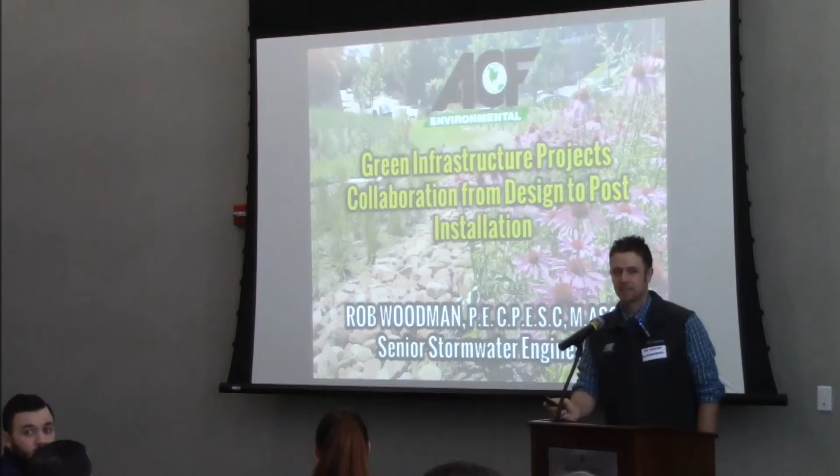And contractors in the room? Okay, interesting. So we did this yesterday too, and there was a much more even spread amongst people here. And those who work township, government, municipal, conservation district folks, obviously stacked over on the bench here as well, a few at the back. Okay, great. Biologists, thank you. Sorry, I will forget some, and there's probably some others out there too. My goal is to not offend any one particular group too many times as we go through this today.

So ACF, the company I work for, we're Maine to Florida. We've got yards up and down the East Coast. We've been around for about 33 years.

We're really the early adopters of geosynthetics and innovative applications, the creators of the dirt bag and really exciting BMPs with really cool names. We're distributors, we're manufacturers, and we make a lot of stuff. We sort of like to say that we sell systems, not just products, and you'll see elements of the kind of system approach we have as I go through some of the case studies today.

The reason I show this is that I get to work from Maine to Maryland, as was mentioned in my introduction. And what's really interesting from Maine to Maryland, there are so many different things going on when it comes to site development projects.

Regulations are different, so different. Even from Maine to Massachusetts, totally different approach to stormwater management, which is crazy when you think it's all part of the same EPA region in a lot of cases. But different soil conditions, different challenges, different experiences with green infrastructure, some of the early adopters versus some folks who may be catching up later on.

So it's a very unique role I get to do, where I get to see a lot of different things that are happening and see programs that are doing well and ones that are doing not so well. And the ones that are doing well are generally where collaboration is alive and well.

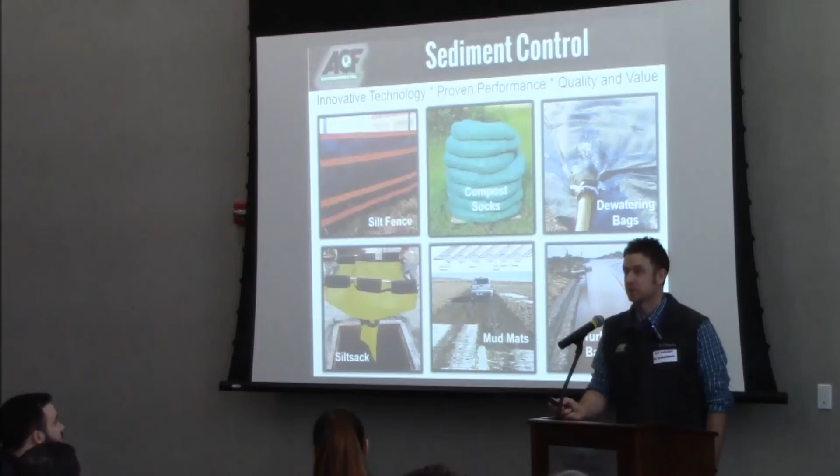Erosion prevention, so ECBs, TRMs, ACBs, geotechnical stabilization, grids, geotextiles, green walls, innovative aggregates, stream bank protection. We're seeing this more as it relates to the MS4 world these days, with either green slopes or just protecting or providing slope stability solutions in the green space, as well as the hard armor solutions. So these are the types of things I get to dabble in.

And on the stormwater side, a whole bunch of different kinds of solutions, from storage to green infrastructure to permeable surfaces and all kinds of filters. And the reason I throw that on the board is that a lot of these different pieces sort of work in concert with one another when it comes to solving challenges in the green infrastructure space.

But enough about that. Today we're going to talk about collaboration - the importance of collaboration as it relates to general site development projects, and also specifically some of the challenges with green infrastructure endeavors or low impact developments. We'll touch on collaboration in design, and I'll go through a number of projects in the grant funded space.

A couple of New England projects that I can share with you, a redevelopment project that's happening in the city of Baltimore. We'll talk about collaboration in construction, which is a very important part of this process if we're going to see our designs come to life in the field and be built the way we want them to be built.

And then at the end, I'll just touch on a couple of programs that I get to experience and rub off on or deal with sort of passively in the city of Philadelphia, and also a project I'm working on in Reston, Virginia with the ASCE headquarters GI retrofit. So that's kind of where we're heading.

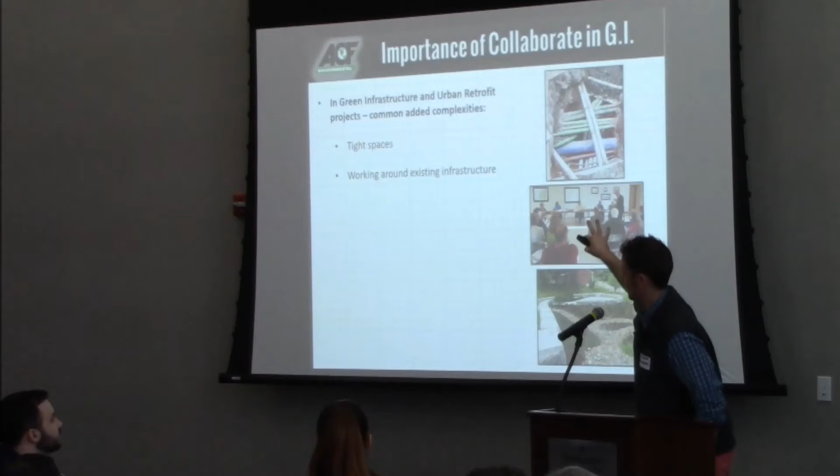Working around existing infrastructure - you don't see this too much in Maine, but as you get into slightly more cityscape areas, the chances of hitting an unexpected utility increase, particularly in retrofit work where maybe the same due diligence isn't done up front with survey work. Coming across unexpected utilities, how do we work around those?

In green infrastructure, a lot of these projects also affect local business. So it's great to be able to plonk a right-of-way bioswale in front of a little strip mall, but does the strip mall know about that? How do they feel about business being affected during construction? That's an element of collaboration and coordination that needs to be achieved.

There's an abutters and public process. A lot of these green infrastructure projects have a lot of folks looking in on them with various opinions as to whether green infrastructure is something they like or dislike.

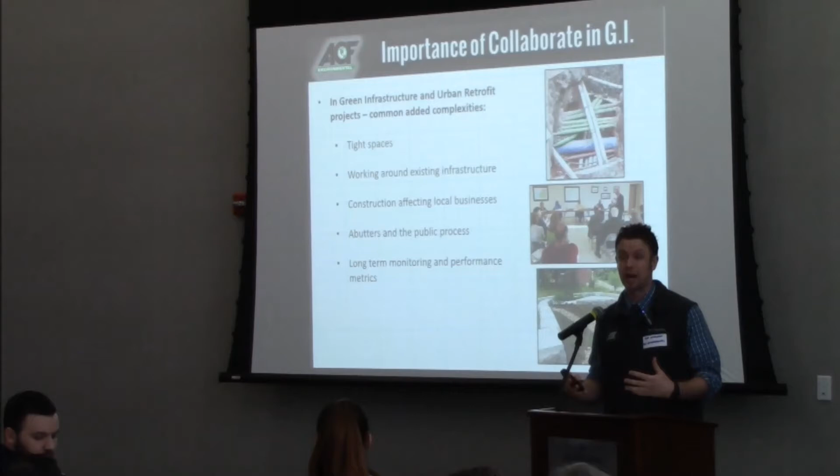Green infrastructure projects also often have metrics for long-term monitoring and performance. So it's not just throw this thing in the ground, but is it actually improving water quality at the bottom line? Aesthetics and maintenance - the idea of not just function from the engineering side, but also it being a feature is a much bigger part of green infrastructure.

In certain site development projects, you can put some kind of wet pond in behind a building and no one really cares too much about it. But in green infrastructure, it's usually tight spaces, usually right around residential or commercial or infill business, and it has to look good too for green infrastructure to keep moving forward.

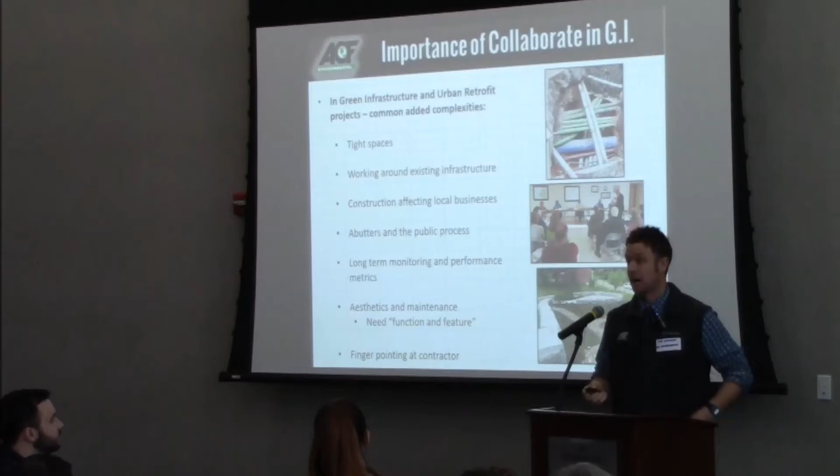Unfortunately, in green infrastructure as well, we don't see a lot of collaboration between the design team and the folks building it. Because of that, there's a lot of finger pointing that we see at the contractor post-installation. But is that finger pointing justified? All the engineers are like, yes, it is.

I'm going to finger point all day long. But do we do the best job we could as designers to get these contractors set up for success? Maybe we do, and maybe we don't.

We start at the top to bottom. So, organic mulch. Organic mulch is a very generic term that could mean a lot of different things. Is that softwood? Is that hardwood mulch? Is that diligently screened, or is there a lot of fines in that mulch that are going to clog the system from the get-go and not even let water through that surface layer? Is that a bag of red mulch from a Home Depot, or is that something specially sourced from a landscape yard?

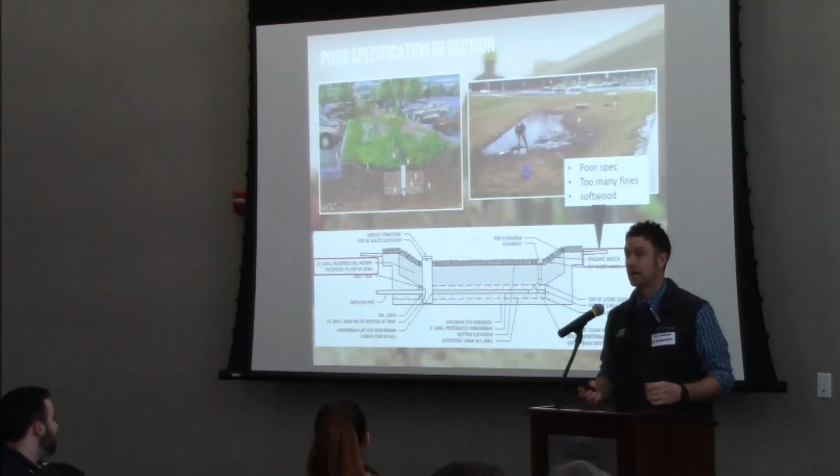Is that a fast-draining material? Is that a slow-draining material? And that also ties into, is that the right material for certain types of plants? Trees, or should it just be shrubs, depending on the depth and the type of material in there?

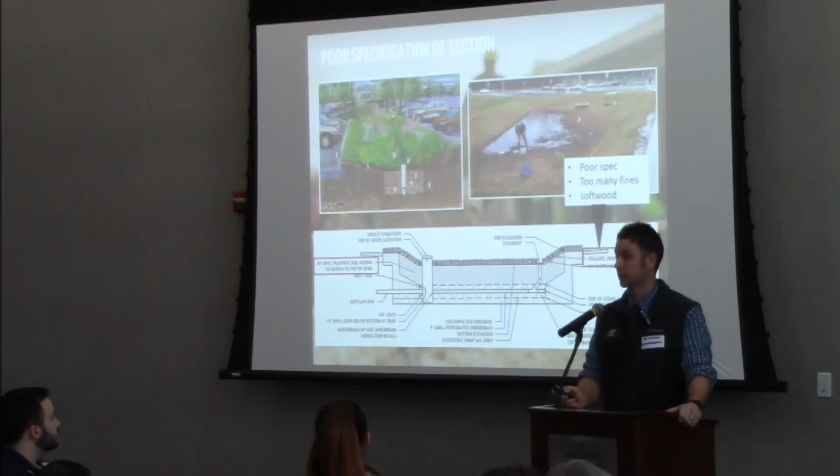Also, when it comes to water quality, what are we using for our organic content? If you think about the research out there from ASCE and their BMP database, the compost-based medias are showing to release a lot more nutrients than they're actually pulling out. So you might put in the system, it might drain fine, but are we actually improving water quality at the downstream end? We might actually be leaching out more nitrogen and phosphorus than we thought we were pulling out of the system. Something to think about.

Does it work, or does it actually work for the purposes of water quality? Is that material mixed in the field? Is that sourced from somewhere special? Are we actually testing that material to make sure it drains and has appropriate water quality? Something to think through. When we get into the sub-base materials or the stone layer with the underdrain, you'll see here it says a geotextile wrap on all sides.

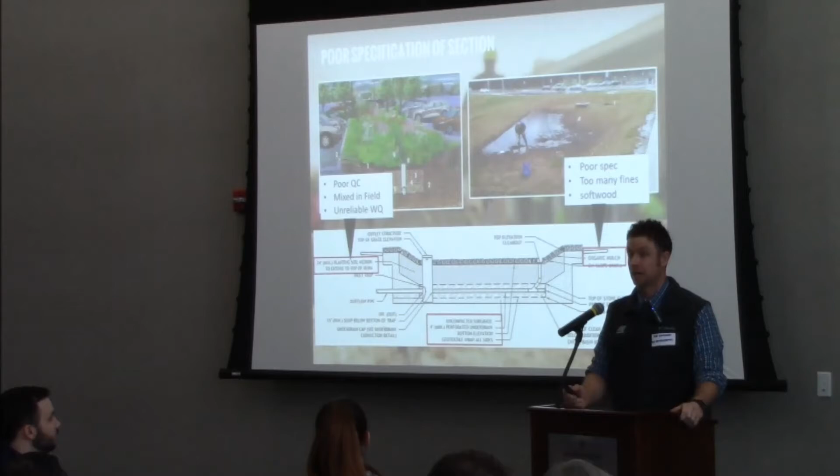For those who have been in the construction industry for a while, you know there's a lot of different geotextiles out there. I joked yesterday that obviously the clothing we're wearing today, geotextiles, even these pink pants—one might say my wife and I need to collaborate more on my fashion sense—but these are all geotextiles, and you're not going to wrap an underdrain with your shirt. You might if you're really desperate and running out of material on site, but probably not going to happen.

So what is that geotextile? When I was working as a civil engineer, I wrapped everything in Mirafi 140N. That's just what I did. Everything. Need fabric, 140N. 140N. I probably made Mirafi a ton of money over about 10 years using their fabric in absolutely the wrong applications every single time.

That's a great 3.5 ounce separation material, but that may not be the material you need for your application. So when you're doing a detention system that doesn't need to be formally lined, a non-woven is a good material, but usually not a 3.5, usually like an 8 ounce, a little beefier so it can hold up to the installation. When you're doing infiltration, we generally use woven monofilament fabrics. They have similar drainage passage to a non-woven, but they're less susceptible to clogging. Something to think about for infiltration.

It's not just a fabric. What kind of fabric is that? Obviously, then you have liners and all kinds of other things. We even use a material called a microgrid that Tencate makes. It's called SR18, a small biaxial geogrid. It's a really good clog-proof layer when you're wrapping like a stone envelope and just want some basic separation. Important to think through these things, and it's kind of funny to look at, but I'm sure we've all been guilty of just grabbing a detail, plunking it on a plan, and maybe not thinking through these individual components.

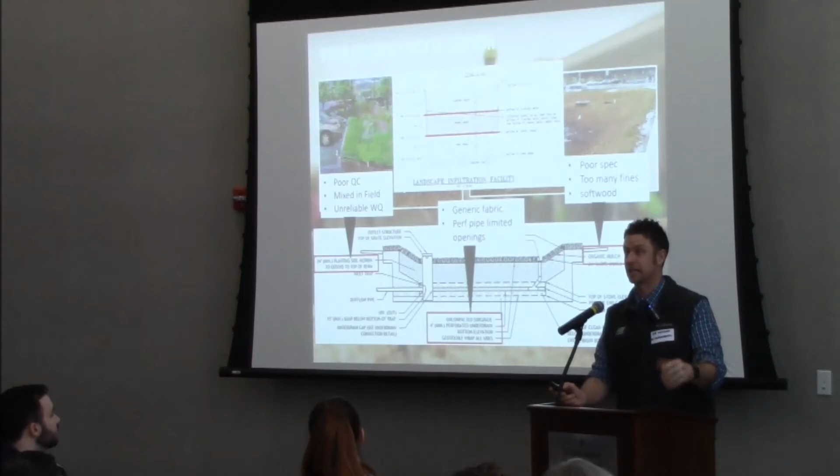In Maryland, they have a BMP called the Landscape Infiltration Facility, and they actually put 2 layers of fabric through this BMP. So if you spec the wrong fabric and happen to get particles or water through that first layer, it's kind of like a game show for BMPs. Then you've got another layer to try to make your way through.

Most of the BMPs, we're seeing a lot of manuals, and PA fits into this somewhat, starting to move away from geotextiles altogether and just have a smart transition layer from a finer material to a coarser material as you transition to the underdrain layer. So just be thinking through this: is the geotextile necessary, and if it is, what kind of geotextile do I want to use?

Then we get to plantings. Plant health - what kind of plants are appropriate for these types of medias? If you have 18 inches of high flow media or sandier material, it's probably not the place you want to put a nice big tree with a 2-foot root ball. It's not going to do well, survive, or thrive in that environment. But trees obviously want a nice, rich, deep planting soil.

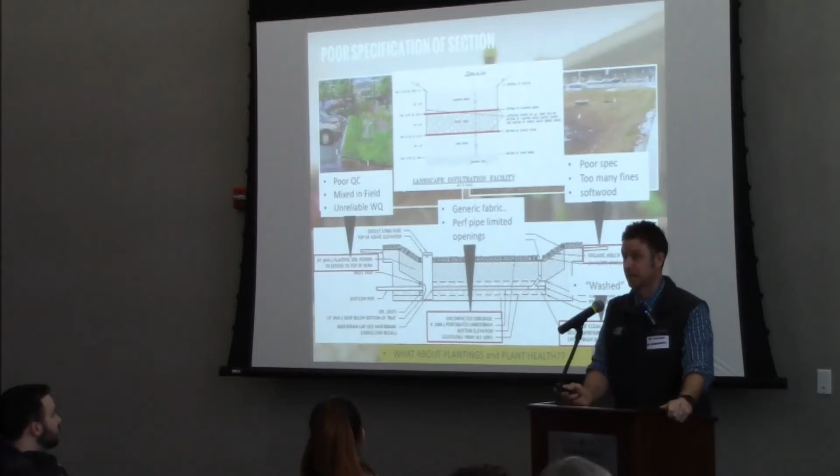So maybe there's opportunities to do trees beside our bioretention system, but maybe not right in it. And maybe in the bioretention system itself we do smaller shrubs, perennial grasses, black-eyed Susans, daylilies - these types of things. Native plants, of course, as you'll hear about a little later. But these are important things to think about, because if we don't do that, we'll get into some issues.

A little note on civil engineers versus landscape architects, a classic battle historically noted for decades. The civil engineering plan can be kind of simple and boring and geometric, and oftentimes when civil engineers design these systems, there's a missed opportunity for function and feature. Everyone has a different appeal and aesthetic for different things.

But here's a classic civil engineering system. It's a perfect rectangle of mulch. I went out there with a protractor and made sure it was exactly 90 degrees. So everyone in this room who raised their hand for the civil engineer category would be pleased. And there's one plant species, perfectly laid out in rows and lines. Well done - a civil engineer was here.

The next one, plants were just optional, and we decided to beef up the riprap just to make sure, again, we knew a civil engineer had been there. And these maybe aren't what folks are thinking of when we present this great plan for green infrastructure to a municipality as the future. But let's flip it around.

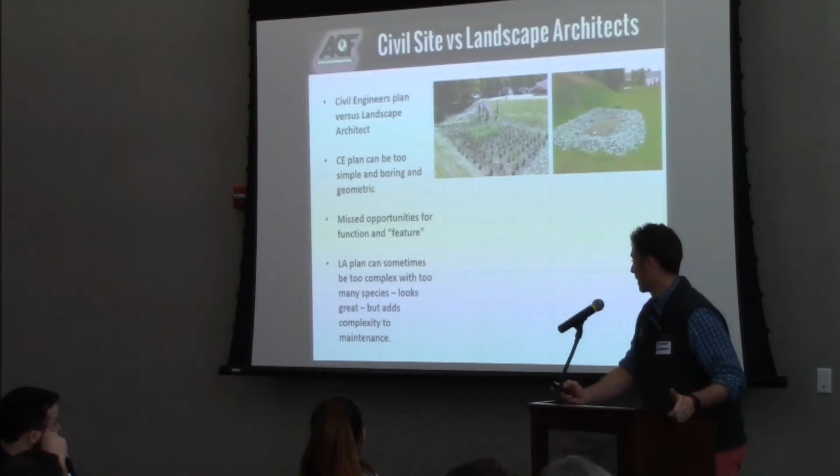Landscape plan can sometimes be a little complex with too many species and maybe adds complexity to maintenance. So while this looks nice, unless you have a very qualified contractor coming in to maintain this thing, they'll either kind of freak out and walk away, or deadhead the whole thing thinking it might all be weeds. Neither of those are probably acceptable reactions.

A lot of the research I'm seeing out there, and some of the papers I've seen recently on LinkedIn, suggest that 3 to 4 plant species with a little variation in height and seasonal color might be the right mix for a rain garden treating water, or a bioretention system, spaced appropriately so you have room to access and maintain and clean that media surface.

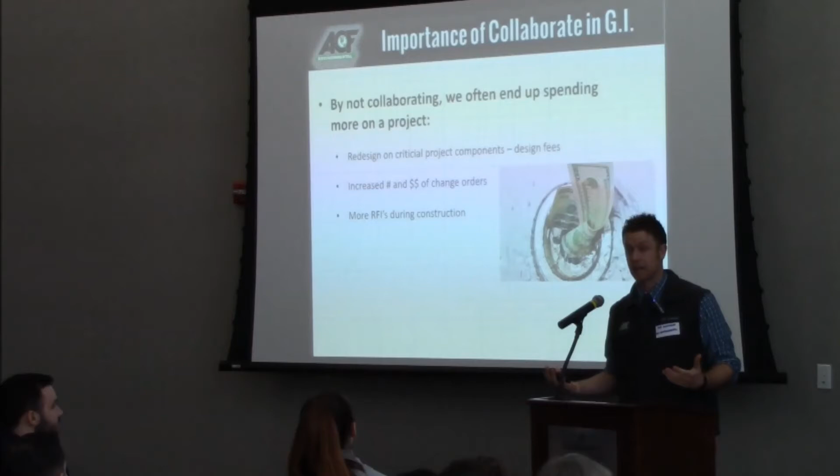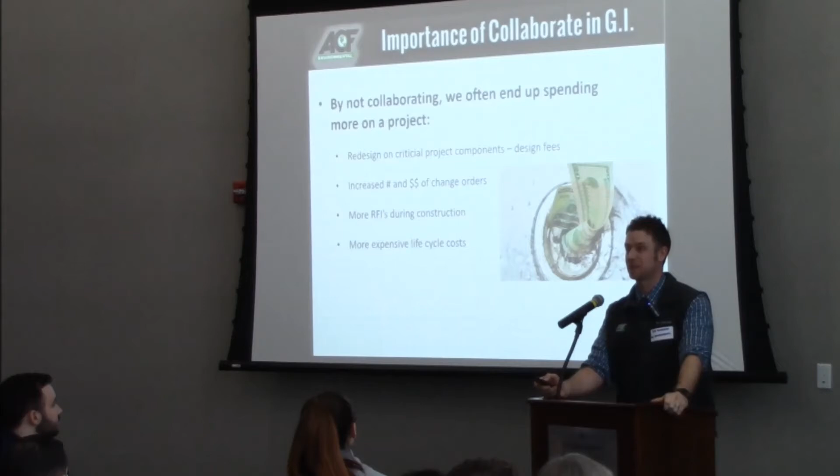Sometimes you get more expensive lifecycle costs, and that's usually just a communication issue between the owner and engineer. They may not actually be more expensive, but they might be perceived as more expensive if the owner believes, like many do, that BMPs never need maintenance. But as I point out, your car needs maintenance, your marriage needs maintenance, and guess what—stormwater BMPs need maintenance too. You also get more complaints, which means more processing, administering, and maybe making changes beyond the scope of the project.

So with all that said, that highlights a lot of the challenges out there when folks don't sit down together and do business at the table. You might be asking, how does a guy who works for a products company like ACF fit into this mix? Well, we get a unique perspective on the industry because we work with both engineers and contractors. So we have this kind of unique position where we can actually initiate collaboration between these parties, which seems a little bizarre.

But these days, with contractors spending less time working with engineers and engineers spending less time in the field, we're in a position where not only do we have a bunch of innovative solutions we help folks with, but we're working with the engineer during design, helping them through that process, whether it's with our systems or just coming up with the appropriate fabrics and liners and those types of things to use.

But we also are out in the field with the contractor during installation, so we get to see a lot of things going on. Some have gone really well and some have gone poorly. And it's usually because the contractor and the engineer have never actually met and spoke. Plans went out, project got bid, engineer moved on to the next project, contractor bid the job based on their understanding of the plans and the detail that was there. And now we have a large gap that we have to overcome during or often post-installation.

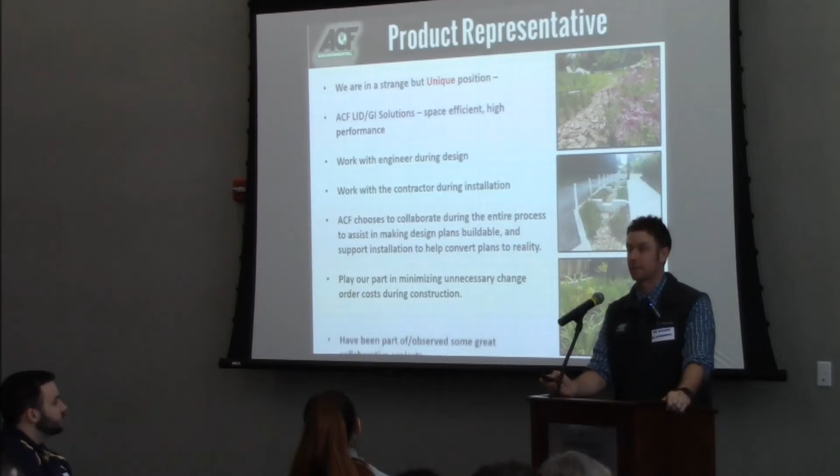So we've been part of some great projects. I'm going to touch on those for a while, a couple of different categories. Up in Maine, that's where I did a lot of my consulting work, so I know a lot of players there. A lot of grant monies going into coastal Maine, southern Maine, coastal neighborhoods, and we've been helping folks through that process.

On grant-funded projects, the parties are usually pretty similar to most projects, but you've got town staff, you've got the DEP, who are usually the ones administering the grant monies and making sure that the money's being spent appropriately, environmental engineers, and local watershed groups who are usually running point on the education component of these projects.

Folks like us get in to try to help solve the challenge, and often we'll get a call saying, hey look, we've got $3,000 in this grant, we've got 11 acres of impervious we want to treat, and we have to obviously walk them back from that and realize you can probably only pick up maybe 500 feet of curb line with that $3,000 budget.

But that's sort of a role we play in kind of tempering the budget and making sure the monies fit the goals. In these cases, Public Works is often the installer of the systems. It's a labor match as part of the grant project. So the grant pays for the materials, and Public Works matches that cost with labor and equipment.

You've got public, landowners, abutters. The specific challenges with these grant-funded projects often involve specific pollutants you're trying to go after. A lot of the work I do in Maine is bacteria-focused, bacteria and stormwater near beach outfalls, but maybe it's metals, maybe it's phosphorus for lakes. It depends on where you are. But usually you're targeting a specific pollutant that may not be your standard kind of pollutant array when it comes to site development projects and permitting.

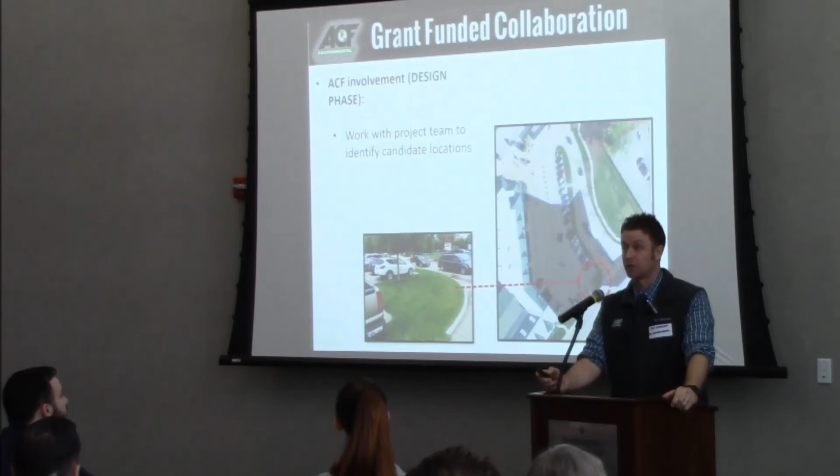The way we work in these projects, we get out there and help with the windshield survey, so we try to identify candidate BMP locations. For those doing this type of work, whether it's MS4 retrofit or any of these types of projects, there's nothing rocket sciencey about this.

When you're looking for locations for these BMPs, the goal often is to look for areas where you get a decent amount of sheet flow already going to a certain location where you can intercept that water and treat it. When you start getting into reshaping pavement, adjusting curb lines, and doing a lot of peripheral work, like adding storm drain lines to feed something to something, you end up spending a lot of your money on the piece that doesn't interact with the actual water quality process.

So this was a good example of taking about a 0.7 acre chunk of a high profile retail parcel right to one location, and all we did was convert a catch basin to a solid cover, open up the curb, and built a BMP right in that island that was designated there. Very little ancillary work needed for that.

We develop sketchbooks, and we do this at no cost, so folks have a general sense of what this is going to look like, what BMPs we're considering, and what the maintenance requirements are. So there's good education on the front end. We talk about which specific pollutants they want to target, and come up with smart, hopefully high performance, space efficient, easy to maintain treatment trains.

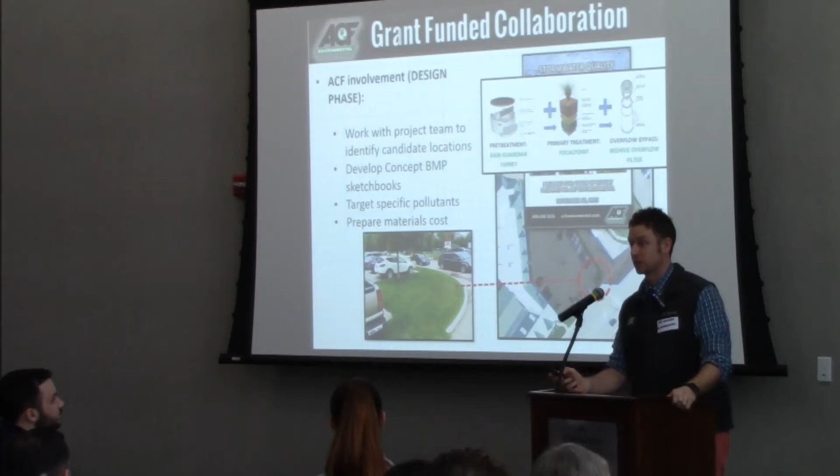Also, we get materials costs. The first round of these projects we did, we came in late when monies were already assigned, and we had to work out how we're going to fit a project to that money. Now we're a little more ahead of it, so early on in a project, we're part of that process. As we're planning for different kinds of BMPs, we're actually building a budget that gets put in when the grant money is assigned, so the appropriate monies are provided, and we're doing much better BMPs today than we were 2 years ago when we were coming out of that hole.

In the field, on these types of projects, from our end, we're procuring materials, delivering them to the site, and we're supporting and coaching the Public Works crew. Generally, we're empowering the local crews to do that. Sometimes, if they're too busy, we bring in site contractors to do the work too.

Our goal is to support education outreach. We don't make any money from doing this at all, but our goal is, in the name of collaboration and water quality, to get out there and help folks with that initiative. Usually you need someone to help, and this is the encouragement to you - each of you here can be the driver and the encourager of moving some of these elements forward, maybe outside of your typical scope, but I think that can make you unique as a professional and maybe for your company as well. Then we do post-installation maintenance, stuff like that.

In Maine, last year I worked with a whole bunch of different towns, going around, finding out what the pollutant of concern was, looking for candidate BMP locations, and installing systems.

A couple of those systems - this is the one I showed you on that windshield survey. This was a high-profile retail, actually the Kittery Trading Post just across the New Hampshire line into Maine. Some of you may have visited there before. Like I mentioned, we found a nice 0.7 acre piece of trib area, went to this corner.

We opened up the curb, converted a catch basin into a solid cover, put in a little pre-treatment unit, dug this 3-foot - this is a high-flow biofilter, it's called the Focal Point. I'm not going to get into that right now, but it's basically a space-efficient rain garden with high-flow media. We built it up in layers with Public Works. You can see Public Works was out there because there's a good amount of riprap there.

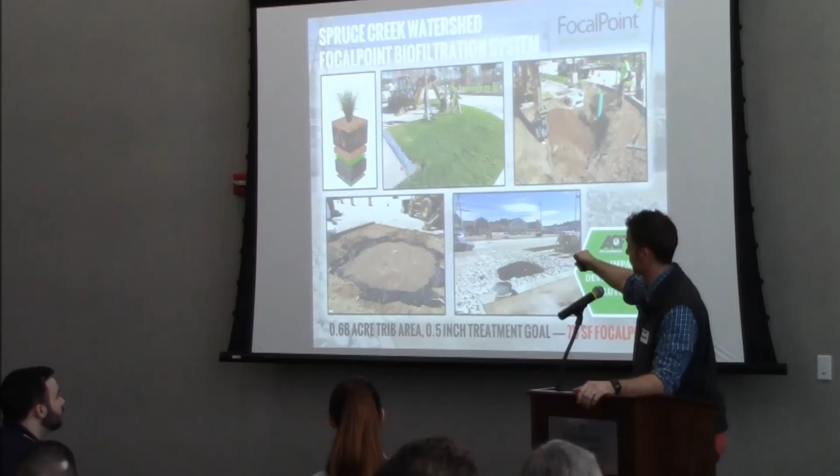The landscape architect in the room, that tree was actually dead before we started, so that was removed and needed to be removed anyway. But this system is very stable. It's not floating anywhere, going anywhere.

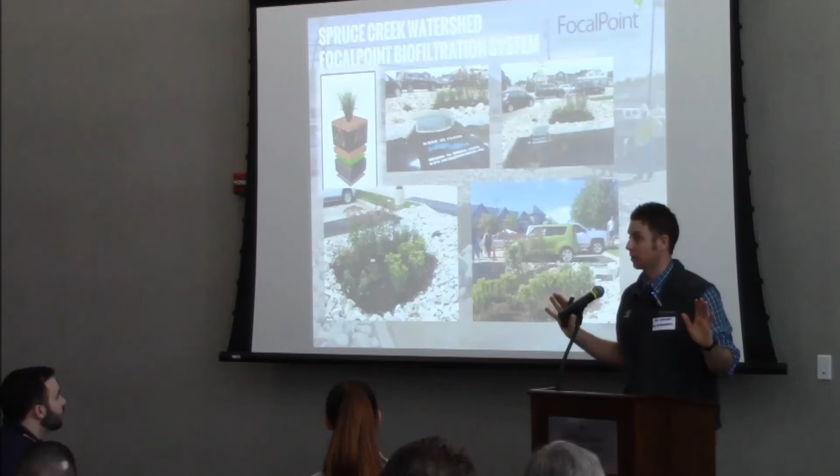What was cool here is we actually collaborated with the owner, because this was on private land. We said, hey, this is the plants we're thinking about using. And they said, whoa, whoa, time out. We have our own landscape architect, our own landscape designer, and seasonally we do different kinds of things. We'd like this rain garden to fit in with our general planting scheme. And it was really cool—they picked the plants, they installed them, and they've taken over ownership in terms of maintaining those too.

So a neat little space-efficient BMP, no parking loss, and great water quality treatment in that little neck of the woods.

But green infrastructure has a really good history of treating for bacteria. We've done our own testing on our system, but just in general, the bioretention—that plant process, all the different things happening in that soil, chemical, biological, and the like—is really good for spearing and trapping bacteria.

So these were put in there to basically collect water from that parking lot, treat it, and then release the water to a beach outfall just downstream, which had been closed and deemed non-swimmable for a portion of last year.

What's interesting in these grant-funded projects is that collaboration is alive and well. And I think maybe on some of those more local, more intimate projects, it's more realistic often for these to be part of the process, or it's sort of anticipated because you just have a lot of parties who want to be heard.

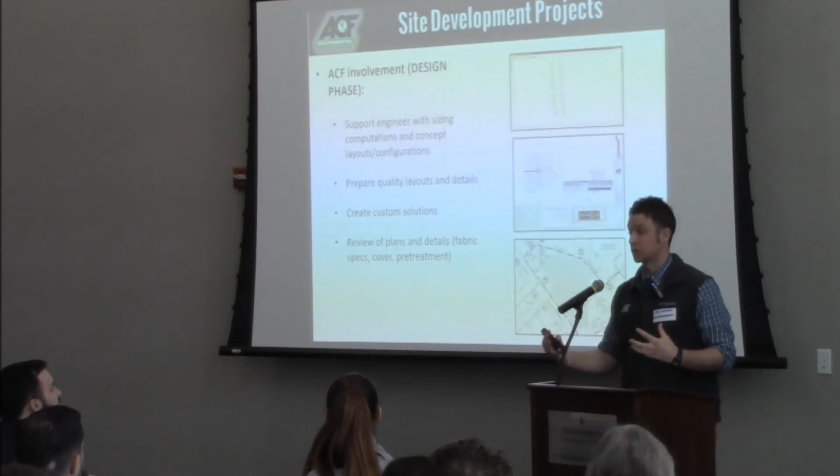Layouts and details, most companies now like us will prepare a lot of layouts and custom details for you to support your project and make your time as efficient as possible. Looking at custom solutions sometimes, and like I mentioned before, happy to review the plans and details. Our goal when I review the plans and details is to make it not just a permittable plan, but to speak into the constructability of the plan too, and the logistics of different trades and other things that are going to be coming through this site during the course of the project.

Other good thing is we can provide really good budget costs. So not only the materials cost, but also a pretty good sense of installed cost based on previous projects. So we do that kind of work.

In the field, we provide material procurement. We have our own pre-construction protocols to make sure everyone understands how these systems go together. And we support the site contractor. When you're looking to work with any kind of innovative company, make sure they have construction oversight as part of their services. That's a really important part because when you're out in the field as the engineer, maybe you haven't seen these systems go in a whole lot before. So it's good to have someone out in the field, sort of a tech or a representative from these companies, just to make sure things are moving along the way that you think they are.

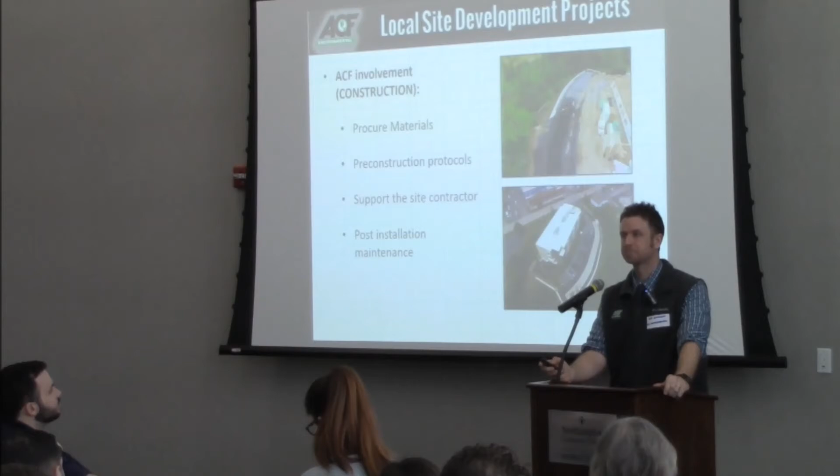Okay, a couple little projects here. This is a great example of when we talked about different kinds of geotextiles earlier. This was an infill housing development project. They demoed a little individual single-family home and somehow built 4 housing units on the lot. It's like a postage stamp lot, but that's the way of the world, it seems, these days.

What's interesting is from the face of the building all the way out to the edge of our subsurface system, our R-tank, there were 5 different fabrics used, 5 different materials used to make sure the system would perform correctly. So when I first got this plan from the engineer, they just had a line that said geotextile, kind of wrapping the irregular shape of this section.

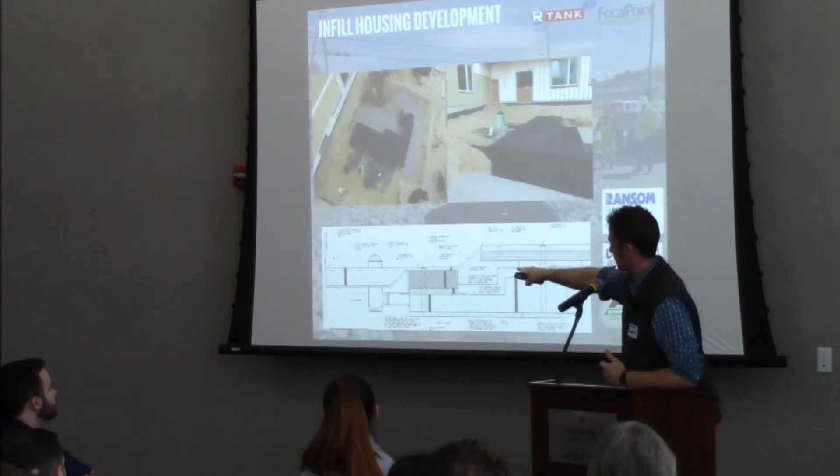In the end, roof runoff comes off the roof and hits this riprap spillway, or splash pad. Originally we were talking about using a liner around that riprap apron. However, the liner would prevent water from eventually draining out, so you might have a mosquito issue. But we also didn't want it to drain too fast because there was a foundation drain in the corner, so we didn't want it to short circuit straight down to the foundation drain instead of going through the treatment process. So we used a much heavier fabric, like a 500X, underneath that riprap so it would drain slowly but wouldn't be free draining, and also wouldn't pond over time.

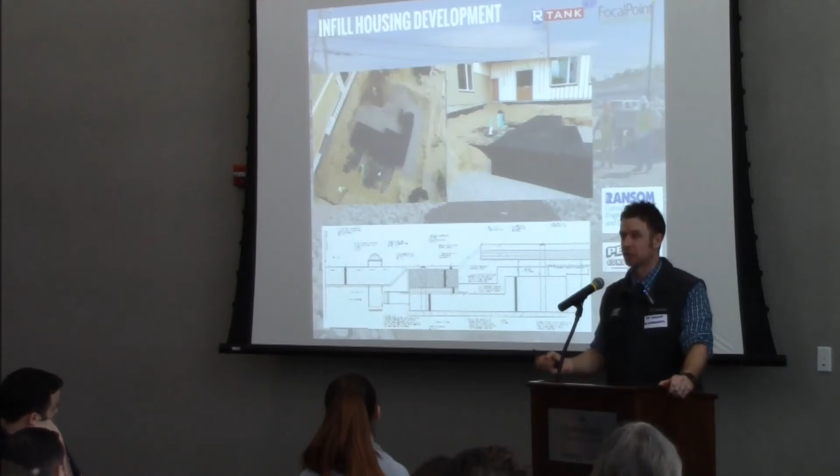Water came through that spillway, stepped up over onto this biofilter, one of our FocalPoints, and filtered down through. We transitioned to a non-woven fabric as we came out of that riprap area. There was a microgrid and a woven monofilament through our biofilter section, and then we used a little curtain of liner on one edge to prevent water from seeping out the side. So a lot of different materials in there. Again, if we just said geotextile everywhere, the system would not have functioned the way we wanted it to. So it's important to think through those things.

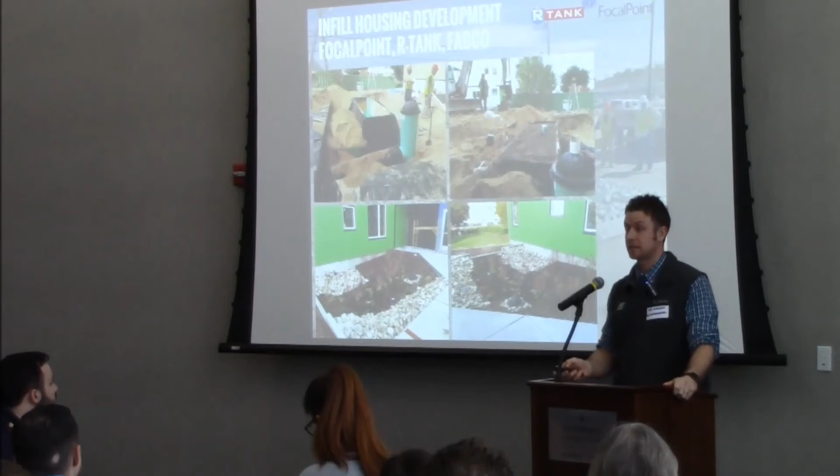This one has a little biofilter with expanded storage. It was built as a 3x11 sort of box, essentially, but luckily we had a great landscape architect on this project, and at the surface they made it more interesting—a little wiggle, a little berming. So it looks like a rain garden from a distance, but it's really a high performance, high flow media system.

A year after this system was put in, this is green infrastructure at its best. The building's actually green as well. I thought that was temporary for a number of months, and I was like, wait, you guys are rolling off site, what's going on with the color of the building? But they somehow convinced the city of Portland, Maine, that it was in line with the local architecture.

Right in the corner you'll see this little rain garden—that's where our biofilter is. And then there's expanded storage underneath all of that concrete patio area. So we got the 4 housing units in this very tight space. We got the treatment done, we got infiltration done, or loading ratio done, we got channel protection and flood control done, all in that space. And there was still that concrete patio area above the subsurface tanks for the enjoyment of those tenants.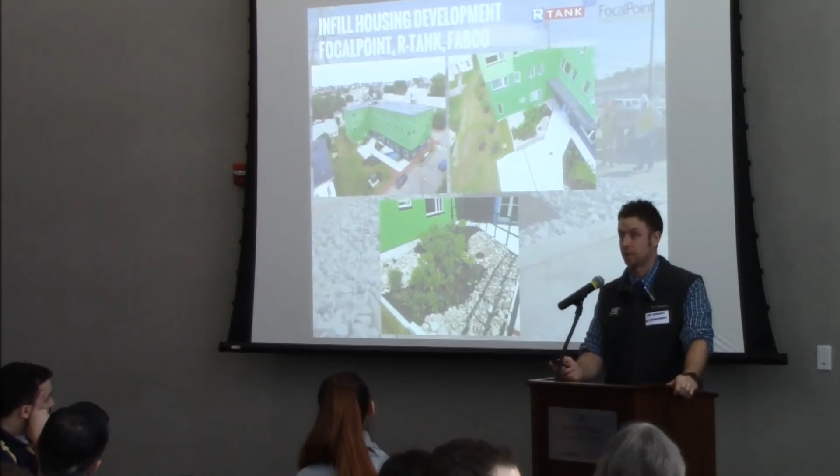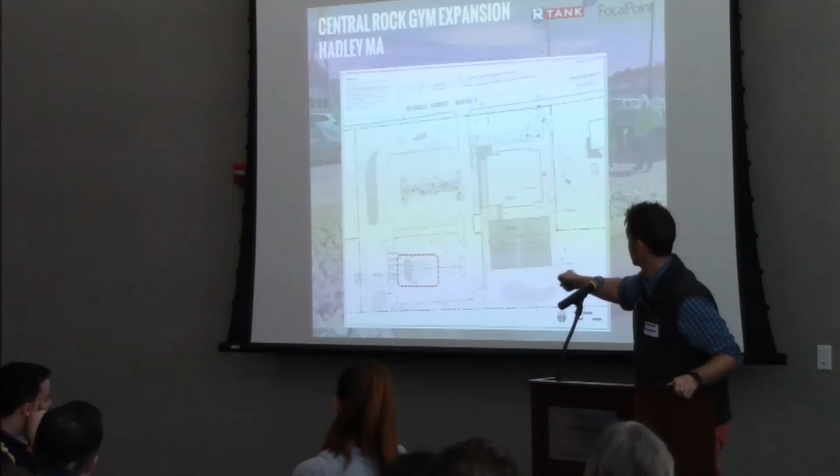This is another interesting project in Massachusetts. This was a rock climbing gym that was adding a parking lot. This was an existing parking lot up top, and a new parking lot lower down. They had the challenge of wanting to basically fill the entire area with parking, like all of us do as civil engineers—pave paradise, put up a parking lot.

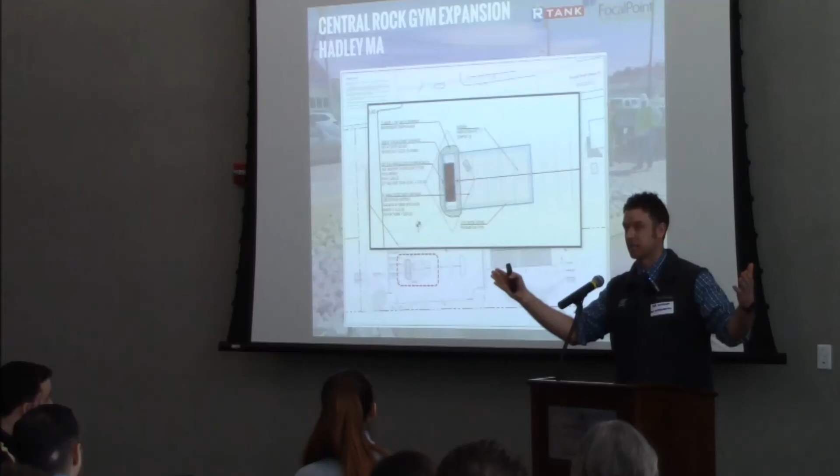We actually were able to get water quality treatment done all within the space of a regular landscape island with one of our biofilters, but we still had to satisfy a volume piece for infiltration and flood control, so we expanded our box under drain back underneath the parking lot. This is a very common approach in PA, where bioretention usually fills up all that land, but with these high flow media systems you can have a space efficient green infrastructure system drop down and still achieve loading ratio back underneath parking with HS25 modules.

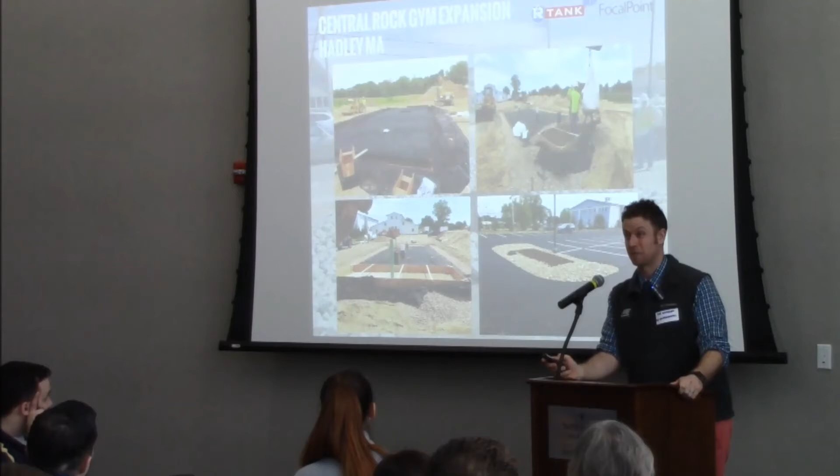So this was it being built up—you can see the tanks going in and then the system being built up. This was very limited vertically, so this whole system from surface of mulch to underside of those modules was about 2.5 feet, very tight with regard to groundwater, but still able to get infiltration done. And here was the finished product, a great little retrofit that took a lot of coordination with the geotextiles, making sure water was getting to the right place, getting filtered and getting handled post-treatment for infiltration.

This is another nifty example of collaboration and coordination. This was actually the same engineer and landscape architect that worked on that infill housing project I showed a minute ago. This is another infill housing project, but right next to an impaired stream, and we had a very unusual shaped area available for stormwater storage. So we used these R-tank modules to create a nice chunk of storage in this arc-shaped area behind a big block retaining wall.

The wall was lined so it couldn't seep through. But this all had to be done in a very space-efficient area. There wasn't room for wet ponds, bioretention, all those types of things. So this one actually had a sand filter put over the top of those tanks, and then it was finished off with an open joint permeable paver.

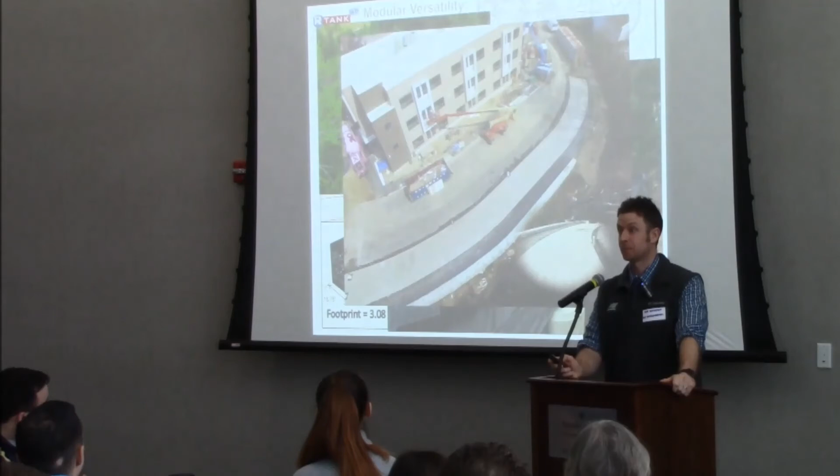You may have seen this project - it was actually in Stormwater Magazine back in May. It's a tight site; building and parking is basically the entire footprint of the parcel. The building directly discharged to the tanks, which are under those pavers. Then the rest of the site sheet flows over to those pavers, goes down through that sand filter, and is collected in the tanks for controlled release below. So a nifty application, but a lot of coordination here.

So when you're dealing with permeable pavers, most of them are concrete. In Maine, as you know, we get a lot of ice and snow, and people love to just douse salt on everything - food, pavement, the whole works. And salt and concrete don't really get along too well.

So it was important that at the front end, when this engineer was thinking about using a permeable paver, that we all sat down with the owner and said, okay, this is the BMP we're looking at, but these are the implications on maintenance. We want to use a rubber tip blade. We want to use light sanding and light salting as opposed to really heavy salting, because over time that'll start to pit that surface. That was important to have, as opposed to coming back a few years later and the owner saying, well, what's going on with these pavers? They're falling apart. Well, what are you doing for maintenance? So it's important to have that conversation.

That's become way more of my dialogue early on when I'm working with consultants now - having a realistic conversation. Okay, yes, this will fit here, or yes, this will achieve your goals, but what does the owner think about having this particular BMP on their site? How is that going to work with their long-term cost of ownership?

In Baltimore, another little project to touch on - I'm working on a project called the Hendler Creamery. It's a redevelopment project of an old brick building in downtown Baltimore. Really interesting group called the Design Collective - I don't know if any of you have worked with them before, but they have landscape architecture in-house, architecture in-house, mechanical plumbing, structural in-house, and the only group they didn't have in-house was civil engineering. So they worked with KCW, who some of you may have heard of before.

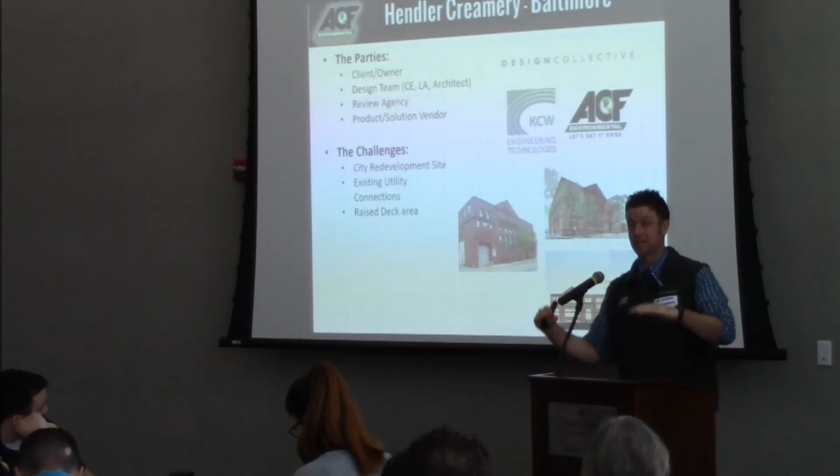This building had a few interesting challenges: shallow existing utility connections in the street, and this redevelopment project was basically going to have a raised deck - parking underneath and a raised deck. So all the stormwater actually had to be at least one level above grade, which is kind of different.

Not only were they looking to treat the stormwater, they're also looking to make this a very high-end raised deck area with pavers and benches and a really nice aesthetic for their tenants in this new residential wing. So they need to use green roof media for the trees they want to plant - lightweight but suitable material. However, that green roof media isn't approved as a stormwater quality treatment BMP, so we needed to use our stormwater media, in the case of this project our FocalPoint system, to handle the stormwater. But the challenge then is how do you direct droplets of water to the right place?

How do you split the water up so you get treatment before you spill over and provide water to the green roof areas? There were also structural components that had to be factored in. This is one of the only projects where the structure of the building was working in sync with the stormwater. We were playing around with the balconies, the deck, where to bring the roof drain, figuring out how to fit everything in and get our permit for both the building components and the stormwater piece.

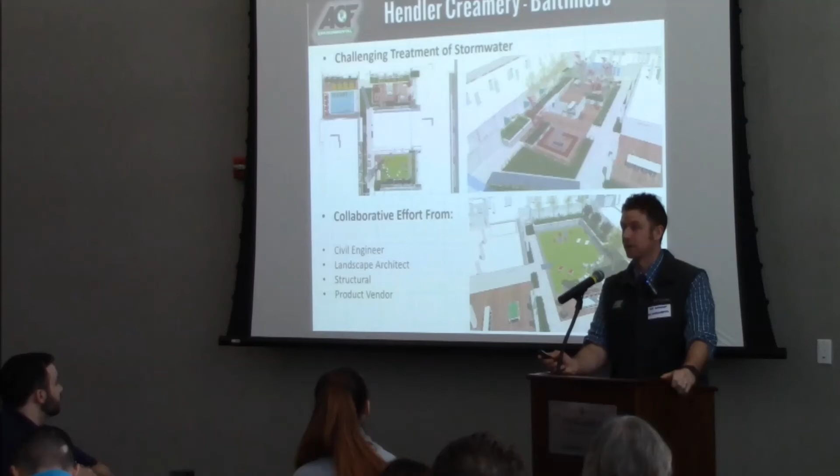These images won't show a whole lot, but as I said, we all sat down and it was this mix of four parties that had to nut this thing out. In the end, you'll see the areas where there are trees, that's where the green roof media is, and we don't typically put trees in our high flow media because they don't do very well. In the lower shrub areas, those rectangles at the end, that's where our stormwater quality areas were.

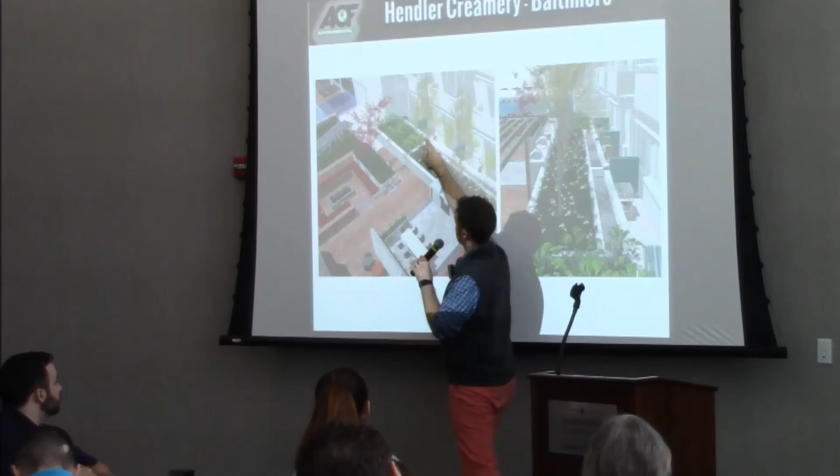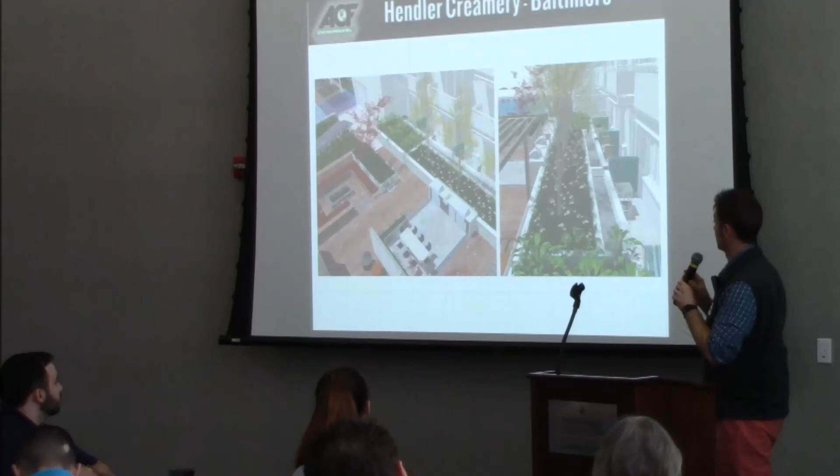You'll see here there are these little partition walls between the different balconies that take water from the roof and spill it out into this trench. This trench feeds these water quality areas, and once they're maxed out, it spills over and backfills into the green roof areas for higher or larger storm events. Looks kind of simple in concept, and you can see that here too. But the challenge, obviously, was splitting that up, getting water to where we needed it to go, and still maintaining the aesthetic that they wanted for their tenants. That one was a bit of a doozy.

Collaboration in construction - a couple of thoughts on this. I think this is one of the biggest areas where we can do something when it comes to collaboration for very low cost, and what we can add to our scope of work. Something to think about: getting contractors involved early during the design process, even knowing they may not actually get the project when it goes to bid. Getting them involved and thinking through these challenges is valuable. They've just built ten sites recently, maybe with a similar BMP, and maybe there were things that made them pull their hair out, and other things they had successes on. That voice is a very important part as you're thinking about the next project.

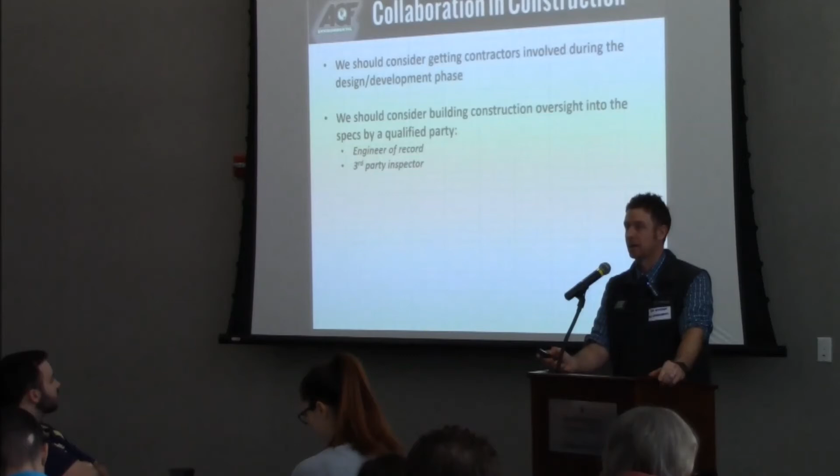Maybe that's local conditions with karst soils, clay, high groundwater table, bedrock, or whatever your local challenge might be. We should consider building construction oversight into the specs by a qualified party. Ten years ago this was standard - as the engineer of record, you would go out in the field and essentially certify the installation. We've got to bring that back. Whether that's the engineer of record, a third-party inspector, or even a product representative.

I bring this up because we often have engineers working with one of our systems for the first or second time, and they may not have a lot of experience with the actual construction sequence of these systems. They know what the finished product needs to be and how much water it needs to hold, or what treatment volume it needs to produce, but out in the field they may not be the right person to be out there - or maybe they're the right person to have out there paired with someone from the product company. That's why I said earlier, make sure when working with these products that they have service involvement built into construction, so you can pair up with them and learn something. Next time around you can say, I've seen this before, I know exactly what I'm looking at, and now that can be part of my services as a civil engineer.

Pre-bid meetings - if you only walk away with one thing today, it's this. Sometimes we have projects on a larger scale, government jobs, school jobs, these types of things, where they have mandatory pre-bids, so every contractor has to go there. But what is the information we want to convey at the pre-bid? Not just, okay, here are the terms of the contract, here's the project, here's the day your bids are due, this is how the project will be awarded, et cetera, et cetera.

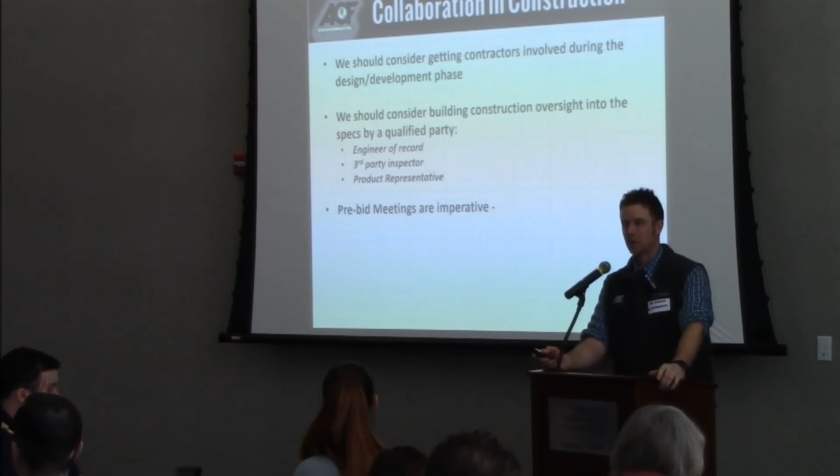But on these green infrastructure BMPs, as the landscape architect or civil engineer, hop up, take the microphone for a few minutes and explain: this isn't your average rain garden. The media I've specified in this system is not something you can make with a few buckets of this and a bucket of that in your backyard. This is a specialty media that you either need to source from somewhere or make a certain way, with certain testing requirements.

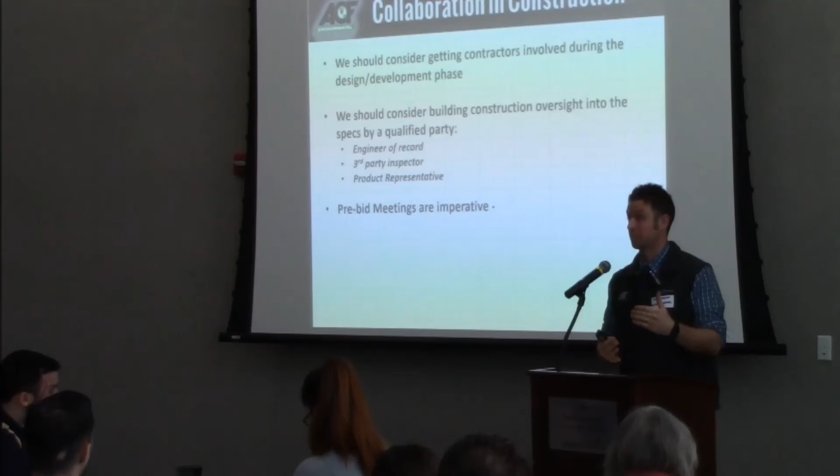The challenge we see when these pre-bid meetings don't happen is we get a lot of differences in the bids that come in. We get some folks who've done these systems before with you as the engineer, and they understand it's not just a standard system, that there's a premium to get the right mulch and the right media. Others might be new to it and end up putting in a very low bid because they're unaware of those specifics.

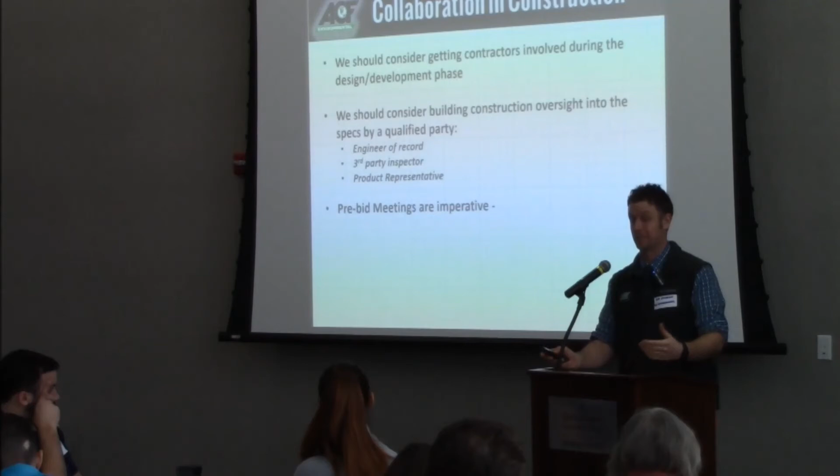And that's often no fault of theirs, because going back to my earlier slides, we don't do the best job as engineers specifying these individual components. So pre-bids are a really good opportunity to get everyone on the same playing field, understanding the components and the importance of the different pieces, even the aesthetic needs, caution around the plants, natives versus invasives, spacings, so we're not just setting aside $200 for plantings and throwing in whatever the local nursery has at the time.

Choosing to work with a contractor, engineers. I was speaking with a site contractor about 18 months ago who had a media for a rain garden rejected 15 times. No comments, just rejected, rejected, rejected.

And as civil engineers, we love that rejection stamp. We love to play that once in a while - like, nope, that's not what I want. I'm not going to tell you what I want, but it's not what I want. Let's get over ourselves a little bit, right? Let's try to work with them and come up with a reasonable outcome.

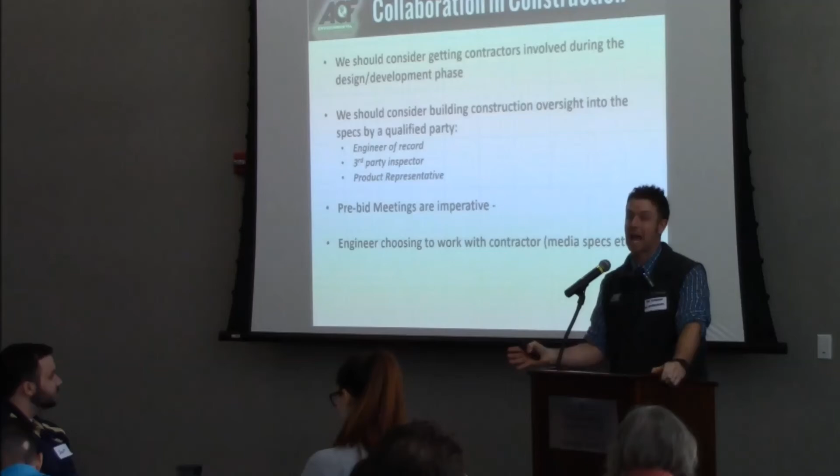Maybe they've learned something from a previous job, or they understand the different sources they have, and maybe they found the media we're specifying has had some challenges in the last job - maybe that's the media that got the finger pointed at them last time, saying, hey, why is this thing clogged three or four days after a storm event? So let's be open to hearing what the contractor has to say and take that feedback into account.

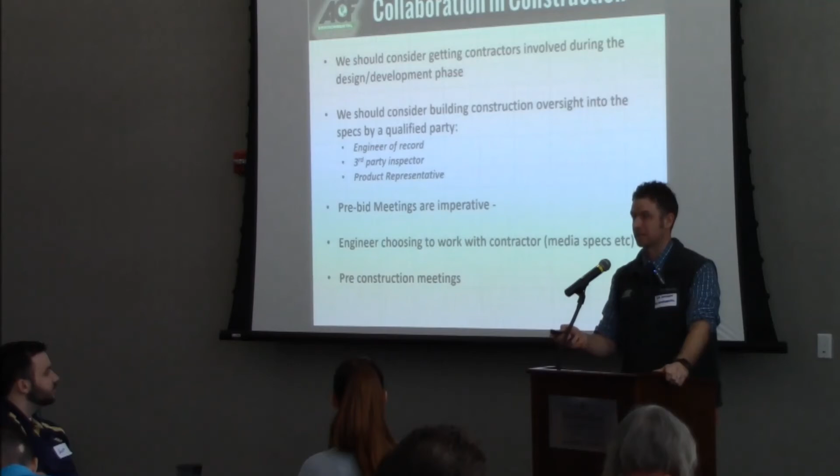Then obviously pre-construction meetings. Now you have a low bidder in place who has adequately catered for all the components of the job. It's good to sit down and say, okay, now we're working with you guys - what are the key components we need to think about moving forward? What are the logistics? When do we want to put plants in? When do we want to put the media in - should we do it early? But if so, how do we protect it from other construction debris, silt, sediments? All those practical things to make sure we don't compromise the system from the get-go.

Last little topic here: urban green infrastructure successes. On the larger, more national scale, the City of Philadelphia - you've probably heard of their Green Streets program. Some of you have been involved in that program in the past. I work in a lot of areas, so I get to see a lot of different things cities are doing, and Philadelphia is one of the cities I find doing the most impressive effort as it relates to exploring what it looks like to green a city.

So my role in that space is I work with dozens of engineers who are trying to overcome your standard kind of challenges with urban retrofit - space, performance, pre-treatment, these types of things.

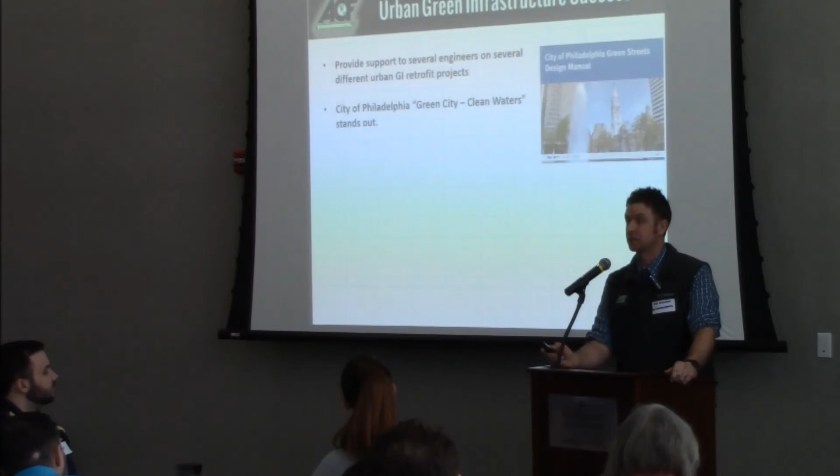Green City, Clean Waters, you've probably heard of this. There's a design manual, you can find a lot of great stuff online, great ideas, great graphics, and great BMPs they've thrown out there. The goal is to maintain or manage 10,000 acres of impervious area over 25 years.

That's a pretty good chunk of area. In that is about 2,500 miles of streets to green, and they're plugging away at it. Every few weeks there's a new project on the street. We provide a lot of materials into this program.

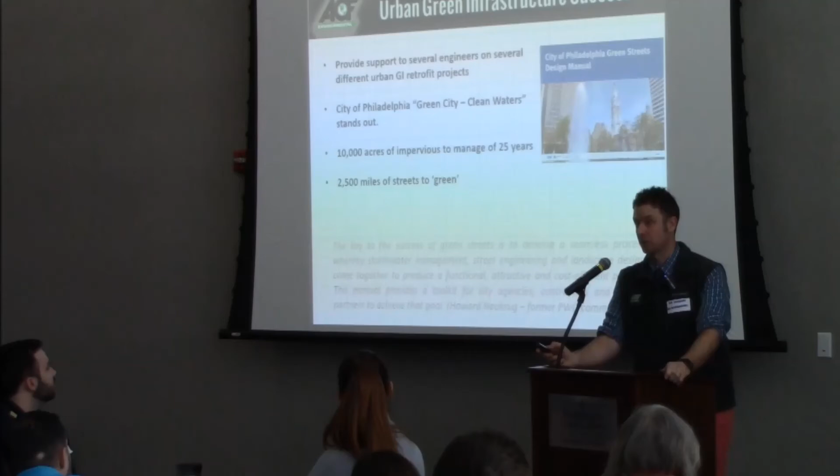Great quote here from Howard Neukrug, who used to be the commissioner there a couple of years back. This lines up very nicely with our concept of collaboration. He says the key to the success of green streets is to develop a seamless process whereby stormwater management, street engineering, and landscape design come together to produce a functional, attractive, and cost-efficient project. This manual provides a toolkit for city agencies, contractors, and private partners to achieve that goal.

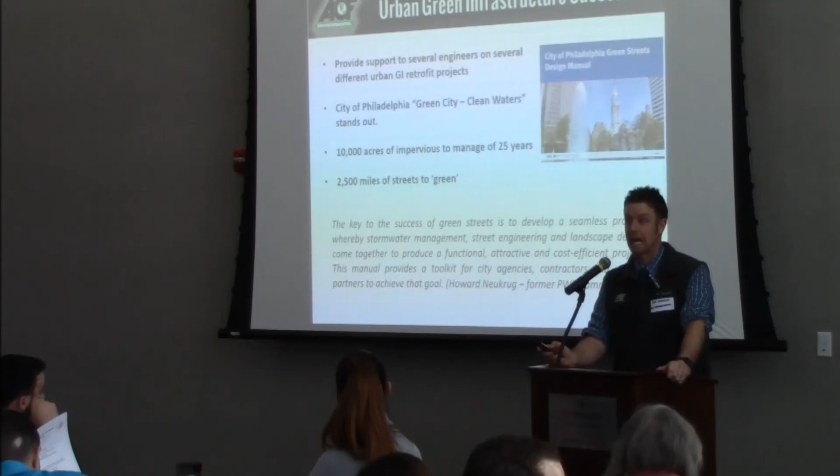It's a pretty cool statement. That brings a lot of the key players into the mix as part of the goals for this project. And if that motto or mission statement is being carried out, collaboration is alive and well.

So what's unique about Philly? I think a couple of things. They've got a variety of green infrastructure options, which is really unique. If you go up to New York City, there's kind of the standard right-of-way bioswales that are rolled out, which is simple from the design side, but you lose some of the flexibility you have in the city of Philadelphia. They allow for innovative solutions, so that's nifty. If you get into a spot where the traditional approach doesn't work, they can transition over to innovative solutions.

We find most of the work we do down there is in pre-treatment and screening, and also in modular storage. They usually use stone at 40% voids for their storage pits on the street. And if they can't get enough storage out of that, they bump up to a high void space module, like our tank or the storm tank you'll see at a different booth out there.

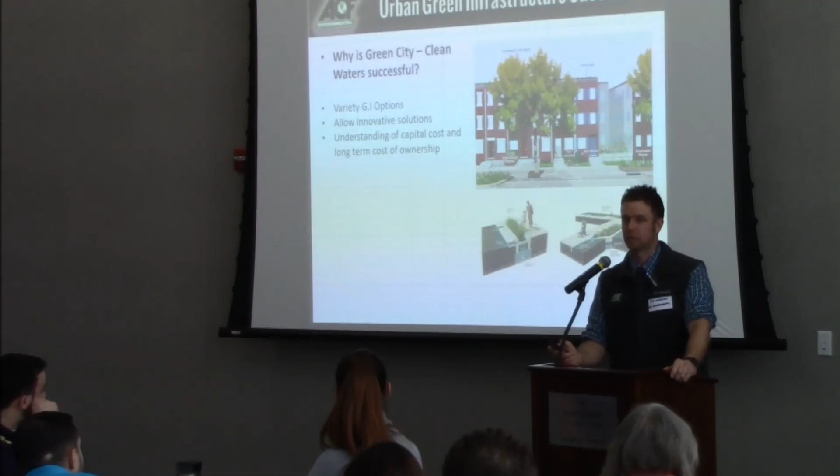They also not only understand the capital cost, but the long-term cost of ownership. So they've invested tons of money and have tons of staff working on long-term maintenance. Not just conducting the maintenance, but studying the variables of maintenance, weighing sediment, measuring and timing frequency, and the efficiency of how long it takes to clean this or that.

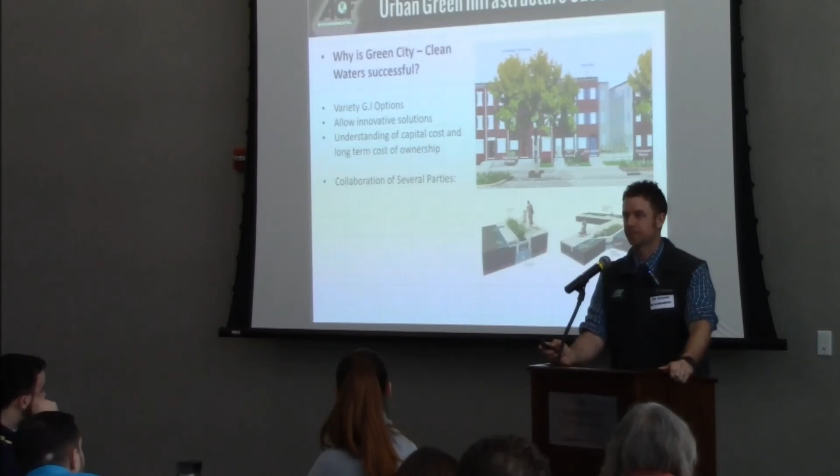And because of that, I think they will genuinely become a green city as opposed to a very weedy looking city that people regret ever doing what they thought they were going to do. How does that all get achieved? Collaboration of a lot of parties.

There's the city officials, you've got the Philadelphia Water Department who administer the program, a great team of people, all kinds of different departments - maintenance, design, plan review - working with private consultants and doing in-house work. Engineers, a couple dozen engineers out there, landscape architects, and there's a huge outreach and education part.

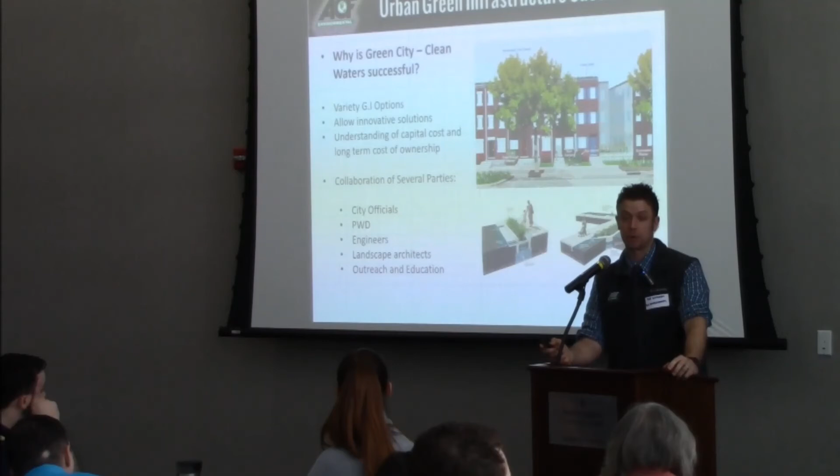So it's very much part of the community, people understand what's going on and what they should be looking out for. And there's also long-term maintenance and monitoring, like I mentioned.

To touch on the whole piece, I think the thing that makes it most unique - and this is something I've really just come across in the last 4 or 5 months - is that maintenance is driving design. Simple concept, not something that happens a lot out there.

Most of the projects we work on, folks hope that these systems don't need any maintenance. I get calls all the time, like, I want to handle bacteria, metals, hydrocarbons, and phosphorus, but it needs to be zero maintenance, that's important for my client. I'm like, oh boy, I think you called the wrong number.

But in Philadelphia, maintenance is driving design. Maintenance has a voice at the table, so when folks are looking at how they can improve details and specs, maintenance is at the table. And it's not just the director of maintenance, it's actually folks who do the maintenance in the field. They're at the table and they're saying, look, I'll show you an example in a minute.

When we go clean out this kind of filter, we dump 80% of the sediment back into the drain. That just doesn't seem right, you know? And without that voice, no changes will be made, and we continue to dump and do all this counterintuitive work out in the field. So here's a great example.

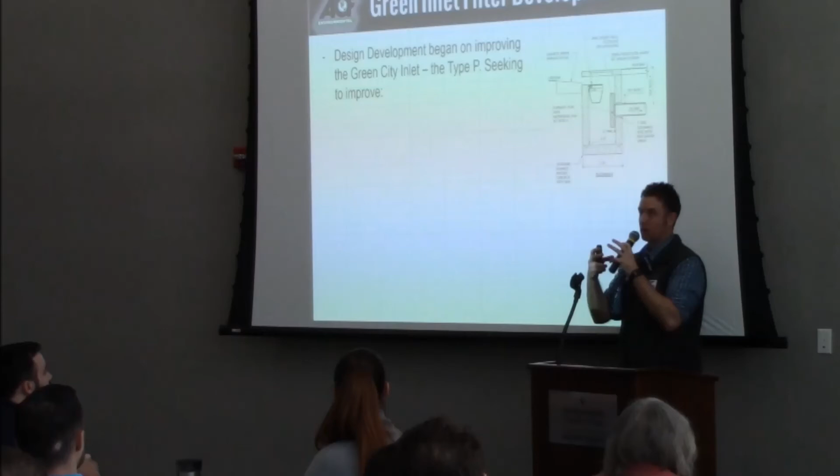There's a filter insert they've been putting in their green city inlet, and we call it the Type P, for a number of years. This inlet, this little insert, is a long, 4-foot long filter bag. They call it a green filter or green inlet. And basically, as water comes in off the curb, it collects sediment and debris.

Now the challenge is when they go out to maintain these, they're generally not using a ton of equipment. So either someone's lying in the street with their legs out into the street, which is obviously somewhat dangerous, and reaching into this fairly narrow hole to hand scoop that sediment out, or they grab that 4-foot unit and bring it out of the drain.

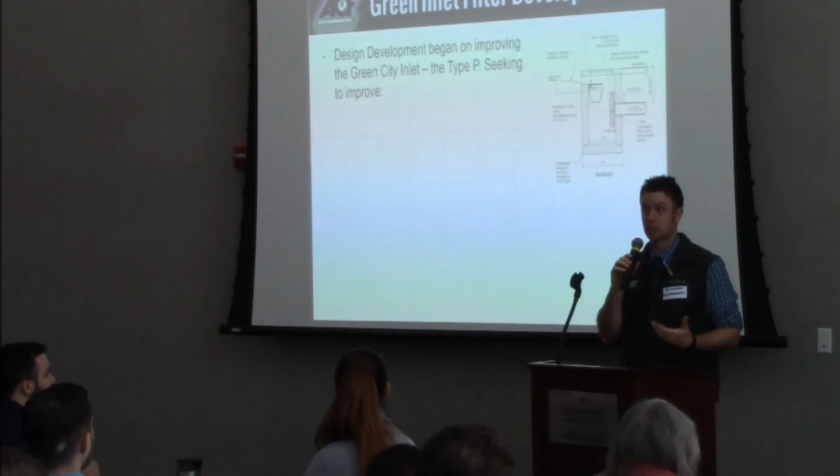The challenge is that drain only has a 24-inch diameter manhole cover. So when you take that 4-foot long trough bag and tip it up to get it through there, most of the sediment falls back into the drain. This has been happening for a long time. Without that voice of maintenance in this collaborative process, we just continue doing the same thing and wonder why we're not getting a different result.

So we actually worked with the Philadelphia Water Department since about a year ago to develop something that would overcome these challenges. I'm going to touch on that, really with emphasis on the importance of that voice in maintenance. We needed something that would be easy to install, easy to maintain, and we had to improve the performance and durability because the system they were putting in kept collapsing and falling into the drain, beyond just the maintenance issue.

So we started working on a product to try to overcome these challenges. The goal was to minimize the danger or concerns for safety during maintenance, and also to minimize the escape of sediment into those drains. So we thought, if we can come up with a circular bag that fits under that 24-inch diameter manhole cover, that should be good, because then you can actually clean it in place, or pull the bag out. Good idea.

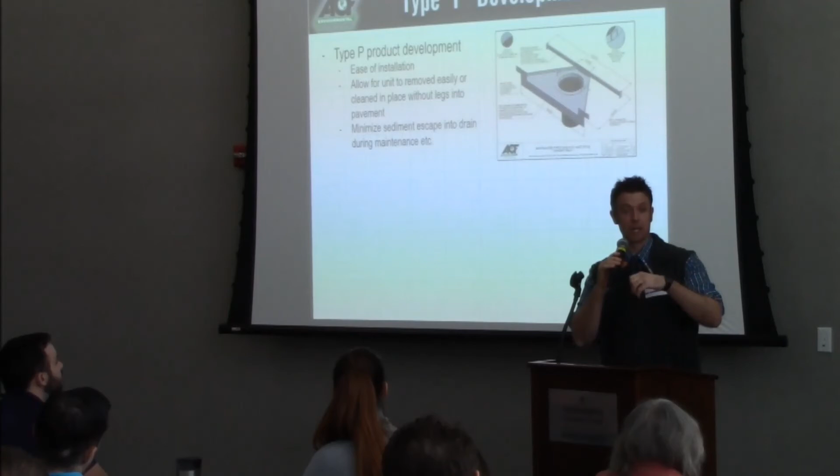And that's basically where we landed on the bag design. But so we made this first prototype, got out in the field, got 30-odd people together, and we're ready to flex our muscles and show how cool we were. And then we realized that the opening we were trying to slide this unit into was only about 2 inches high, and our unit was about 8 inches tall. So it was a very quick end of meeting. Sorry for wasting everybody's time.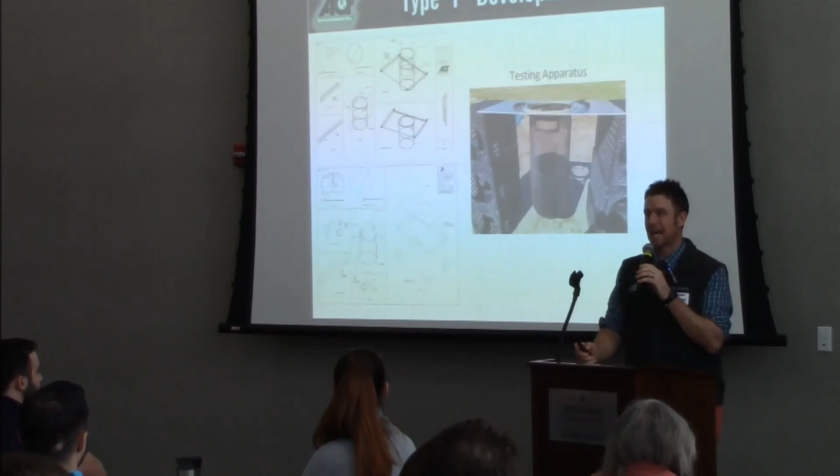We'll be back. So we worked collaboratively with the Philadelphia Water Department. R&D from a product company working with that department, a bunch of markups, a bunch of red lines, a bunch of testing, but we found the key thing here was to make sure this entire unit could fit into an opening that may only be 1.5 inches tall. Kind of challenging. So we went through a bunch of R&D, tried out different metals, different sheets, different thicknesses, different types of attachment.

And in the end, this is the finished product. We finished with this, what we call the Green City filter. This is what Philadelphia Water Department are using exclusively now on their Green City inlet. So we have the circular bag, so that's taken care of. The bag is three-part: there's a mesh on the inside and a mesh on the outside, and then a woven monofilament halfway up the bag.

The mesh on the inside protects the bag when you're trying to clean it in place. The mesh on the outside protects it when they pull it out of the drain and generally drag it across the sidewalk to dump it out. All of these components fit in a 1.5 inch opening. So there's that flat panel, or pan, that's about 2 by 4 - that's one piece that can slide in. And then there are 2 side supports that all fold up to 1.5 inches.

So it's 2 sides, a center pan, and a bag. The bag can fit up through that manhole or be maintained in place with no loss of sediment and no legs out into the street. The only thing that goes in the drain is a person - there is a waist size denoted in the spec. And then the bag goes in after the fact too.

What was interesting is we had this all set as sort of a fixed unit, and then when we got out in the field, we realized that not all these drains are the same. Every single one's a little different, so we need to incorporate some adjustability.

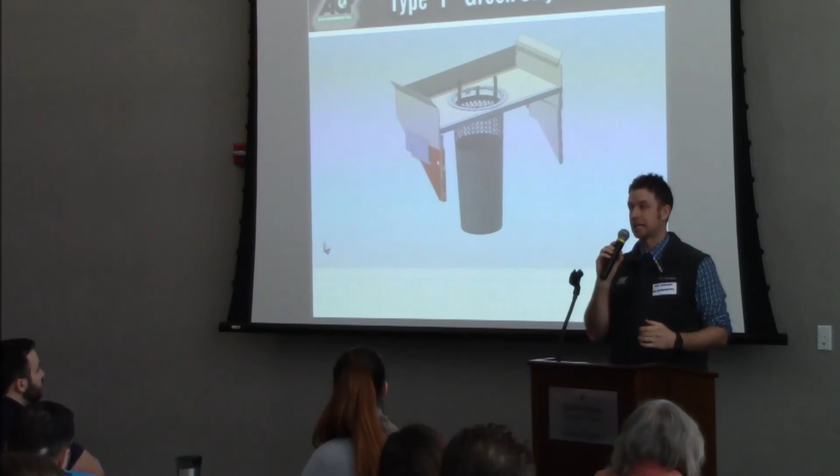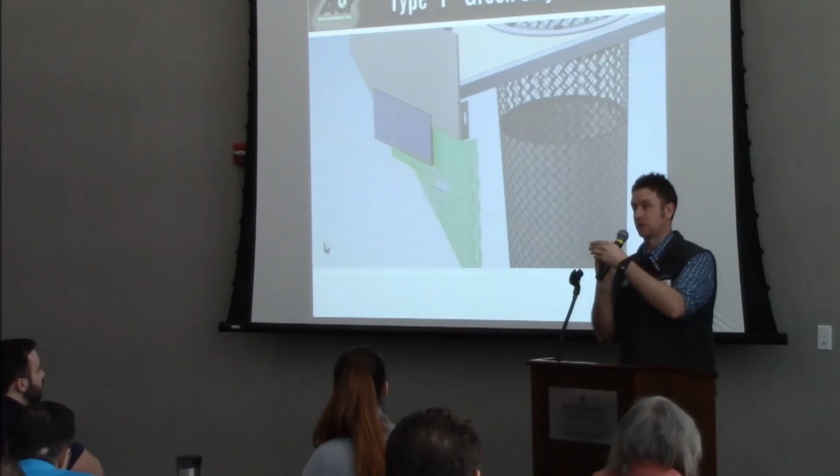Some of these drains have a ledge on the inside where the upper portion is offset from the lower portion. So we added this dovetail flange sliding system to work with that ledge, allowing the unit to slide so the front edge of the pan is always right up against the entryway into the drain.

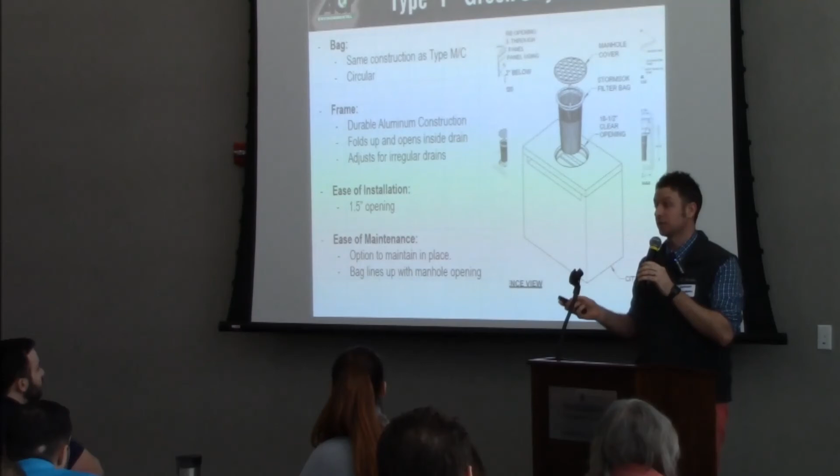Solved a lot of challenges there. Kind of cool. And the product is less important than the process here, as cool as that is for this application. If you work in a municipality with specific drains that need help, we can build custom solutions for you. But the cool thing is this would never have come up if maintenance didn't have a seat at the table.

It was so encouraging that even at our final product release with them a couple months back, they had everyone in the room: design, plan review, heads of departments, but also folks who were actually doing the maintenance. So cool, so simple, but so cool.

Last thing I'll touch on in my final minute and a half is a small retrofit project I'm supporting in Reston, Virginia. Many of you are probably familiar with the ASCE organization - they're actually headquartered in Reston. This is an aerial shot of their parking lot.

It's a large office building with a parking lot on both the east and west sides. About a year ago, they were looking to repave their lot because it started getting a little cracked up. I was out there recently.

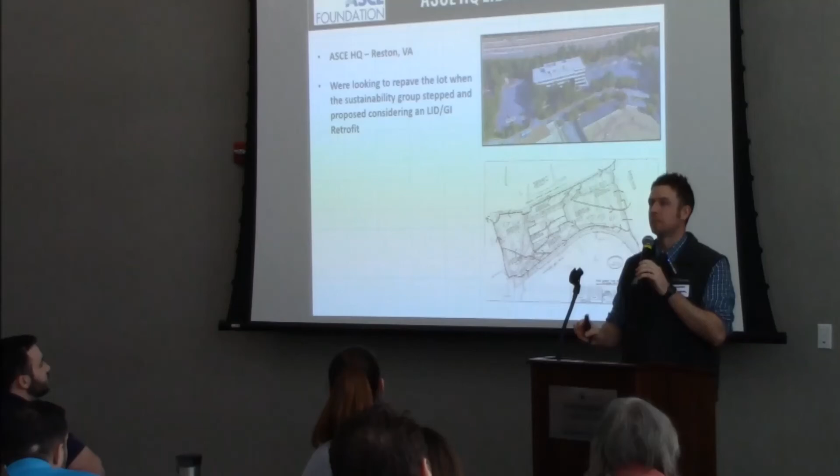I was like, man, you should see pavement in Maine - this is totally fine, you don't have to do anything. But they're still moving forward, so they're looking to do an overlay.

Fortunately, the sustainability group came in and said, whoa, time out - we've got to walk the walk and talk the talk. We have to be leaders here. If we're going to repave our parking lot, we need to look at what it would cost to retrofit it with low impact development green infrastructure techniques.

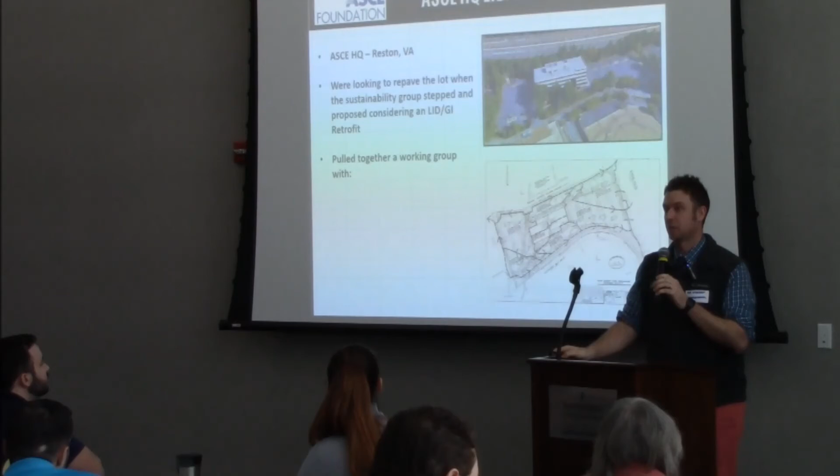So they brought a team together, which I was fortunate to be part of. It included ASCE staff, regional experts, and county officials - this is in Fairfax, Virginia, so we had Fairfax folks involved because we need to understand the permitting implications, even if this is being done out of goodwill.

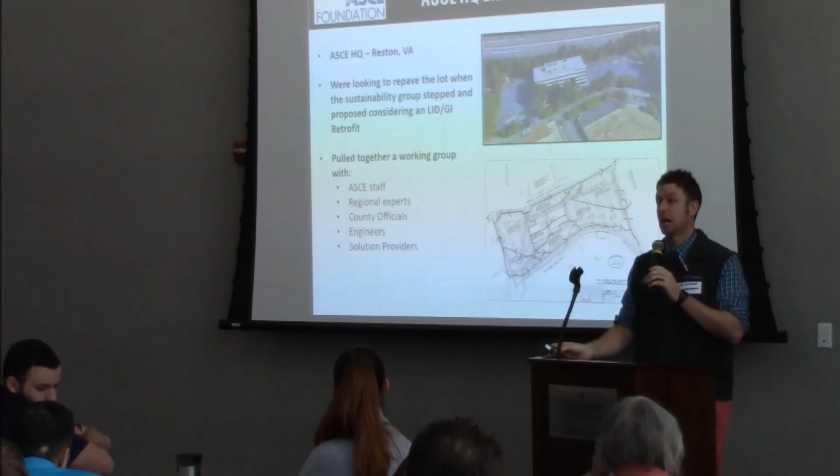We also had local engineers who'd worked in the area before, from the survey side, geotech side, and design side, plus some solution providers - there was a representative from Contech and a few other companies. They knew they'd be looking for participation and donation of materials, but also to gain specific experience or expertise in certain types of BMPs.

There's a feature BMP on both sides, plus a couple of what you'd call MTDs or innovative technologies. It's meant to be a bit of a showcase for different types of technologies, and also to allow local consultants to contribute time or money to the program.

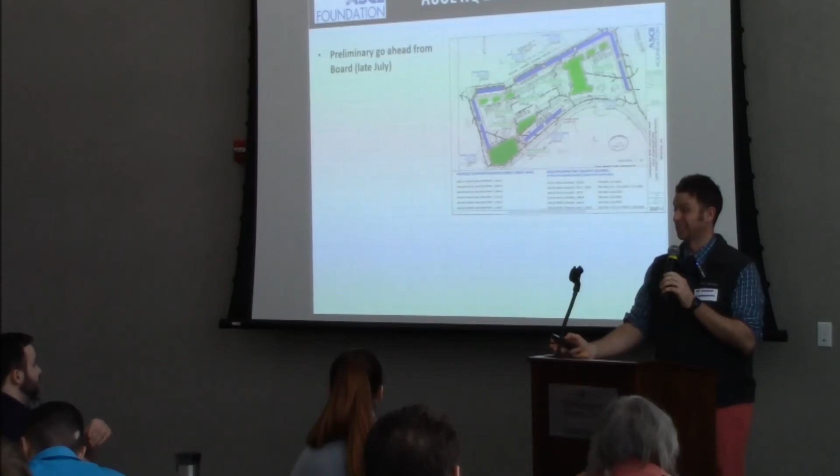In the case of product companies, hopefully they donate or provide materials at a reduced rate, because the budget really was for the paving, with a little bit more for the green infrastructure - kind of like a lot of projects, right?

But if you look at the amount of space these BMPs take up, if you take out all those green and blue areas, that's a lot less area to repave, right? So it actually reduces the scope of pavement, which is kind of interesting.

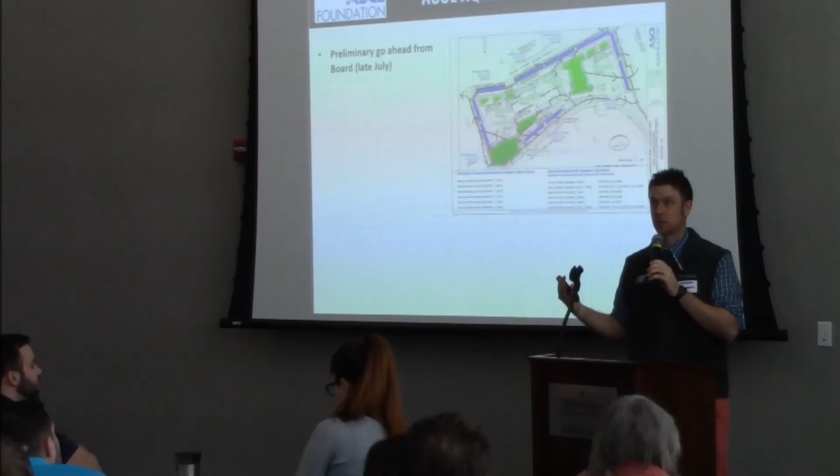Interestingly enough, this will be built in phases, so the permeable pavers won't all happen at once. We're making sure not to repave those blue areas now, because we know within the next 2 or 3 years those are going to be cut out and permeable pavers will be placed. So it's smart to think about this up front, so we don't pay for the whole lot and then in a year's time cut out brand new pavement.

So we're finalizing the budget, always looking for additional sponsors and contributors to that. If that's something that spikes any interest, you can chat to me about it.

Our focus there is water quality treatment, although in Fairfax County channel protection is a big part of the design too. So voluntarily we're considering channel protection. That will all come down to budget, because that'll end up being subsurface chambers, whether that's the ADS StormTech, R-Tank, Storm Tank, or any of the systems that Contech has, or large pipe, those types of things. So that's being considered as an optional add-on.

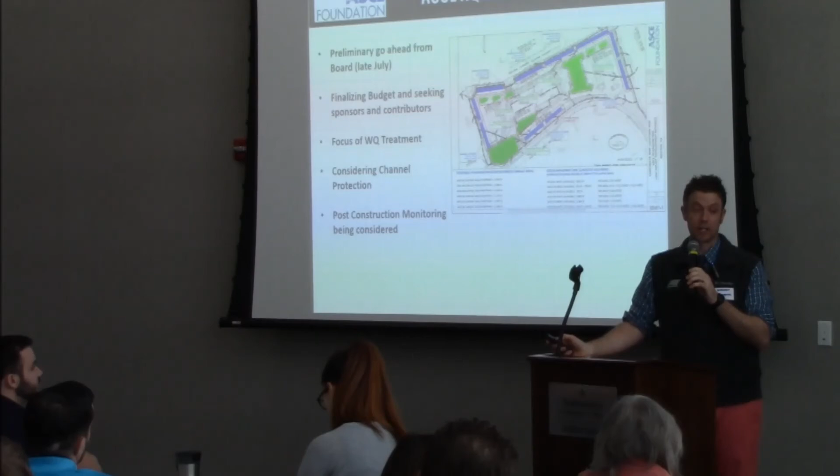Post-construction monitoring is being considered. Originally they had this great plan, hey, we want to test for water quality, we want to test for this and this and this, and for those like me who have worked through the process of testing systems, it's very expensive, and to test those systems would cost more than the project budget. So we're going to focus the testing more on temperature, flow rates, we've got rain gauges already set up on site, so simple, more visual things that folks who visit this site can see, because I'll be doing tours, and this will be a big part of what they promote, I'm sure, across the country, and they want to have some of that component in there.

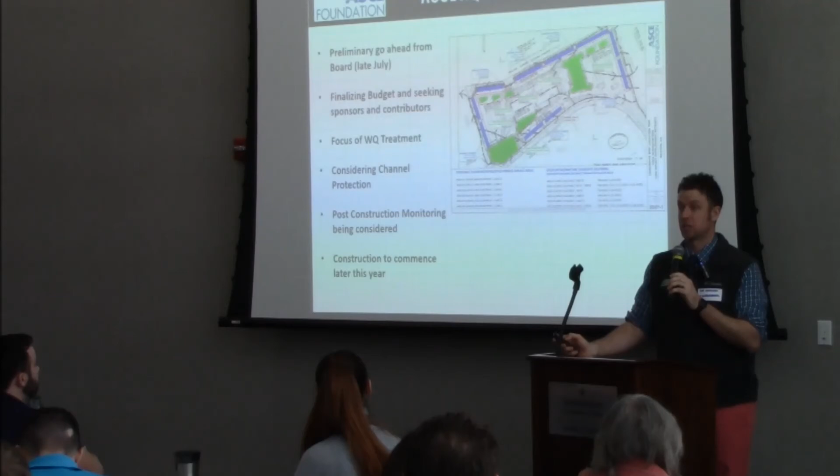And if things go well, construction will commence later this year. I've got a meeting in a couple of weeks to get an update on that. And that's currently what the plan looks like.

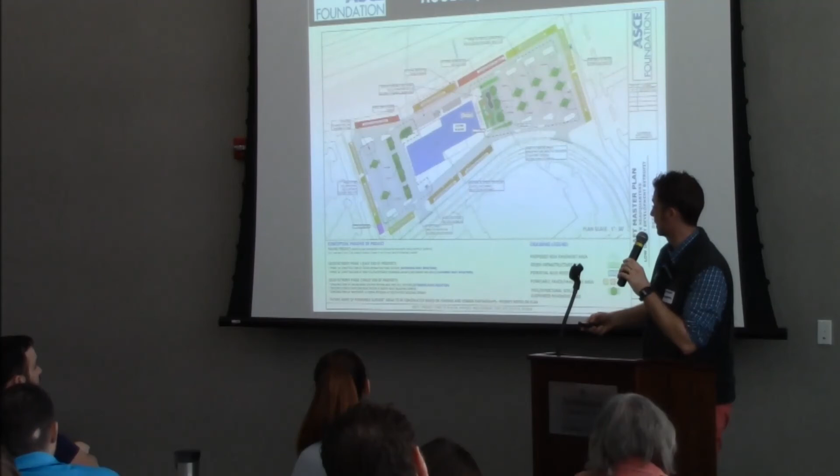So different types and prioritization of permeable surfaces around the perimeter, and then a suite of different kinds of green infrastructure BMPs, from structural soil or those like Silva Cell type BMPs in a couple of select tree islands. High flow biofiltration, which will hopefully be my system in that first BMP they put in, and then there's some others too, a Contech unit, a Filtera unit down the side, a few things like that. So that's where that's at.

But in conclusion, a couple things to think about, and hopefully this will resonate with you as you leave. My belief is that collaboration is critical to successful projects.

Collaboration can look different in different situations, different types of projects, different players, but it doesn't happen by accident. So you must choose, like we said in our definition, to be the collaborator, because I think as humans we generally sit back and wait for someone else to take that role, because we know it's going to take time and effort, and maybe we're not really feeling too excited about that and want to be a little more lazy. But if we sit back and wonder why collaboration isn't happening, it's never going to happen. We need to take on that initiative and be collaborators.

So collaborate, and just to finalize on that definition: collaborate, a purposeful relationship in which all parties strategically choose to cooperate in order to achieve shared or overlapping objectives. So just think about how you can collaborate in your projects, in your community, and the different ways that you can inspire folks to link arms and work together. It sounds a little cheesy, but I'm confident you're going to get a better project at the end, and I would debate that collaboration is going to cost you more money than a project without any collaboration.

So hopefully that was interesting for you this morning, and we can take questions.